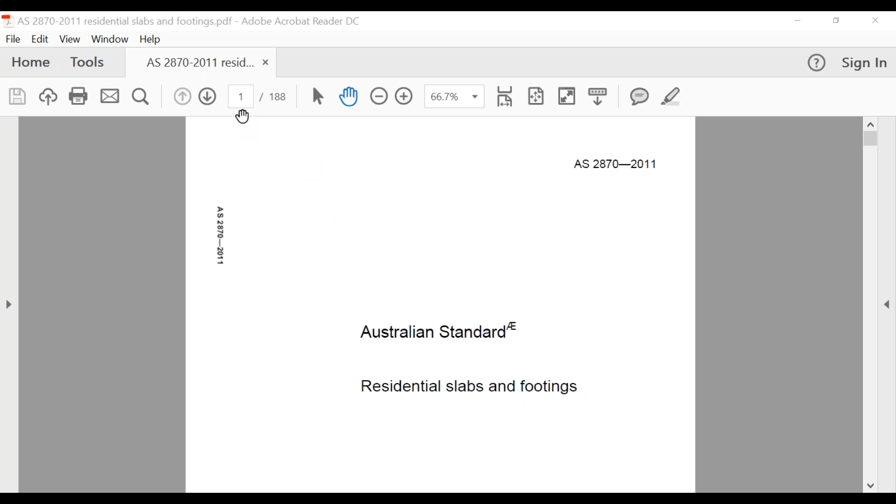But what I want to show you is, and some of you guys might have covered this in your face-to-face classes, maybe you've been given this feedback from your trainers, but I haven't received this until recently from one of my students. So what I want to cover is on page 147 of our Slabs and Footings, and it's got to do with basically doing our raft slab. I'm just going to put this in here and show you.

I've got a couple more pages. Now, as I said, I haven't had enough time to go through this and say this is exactly what's on the assessment, this is what you've got to do, but it'll give you a bit of an understanding. If you read through this tonight on your own, and in the next week or so this comes up in your interview for a DBU, DBM, or maybe DBL, then you'll be able to basically nut it out.

As you can see here, normally the plans we draw with a raft slab are pretty basic, and this one here has got a few indentations in it. So what this actually talks about, there's a few other things I want to cover. I just want to show you the picture there, and then I'll roll back a page and we'll read through what it tells us in our Australian Standards.

So if I scroll back a little bit up here, it just says beam continuity in rafts. We've got this highlighted in a different section of our Australian Standard, but this is in the Appendix C section, whereas the other part we're doing is just in the more general part.

So some of this is going to be the same, but what I want to talk about here, it says - should beams be continuous in a straight line from edge to edge of the slab? This is more important than putting beams under walls when beams cannot be placed in a straight line. So it basically tells us we want to have them in a straight line from edge to edge, and that's more important than putting beams under walls.

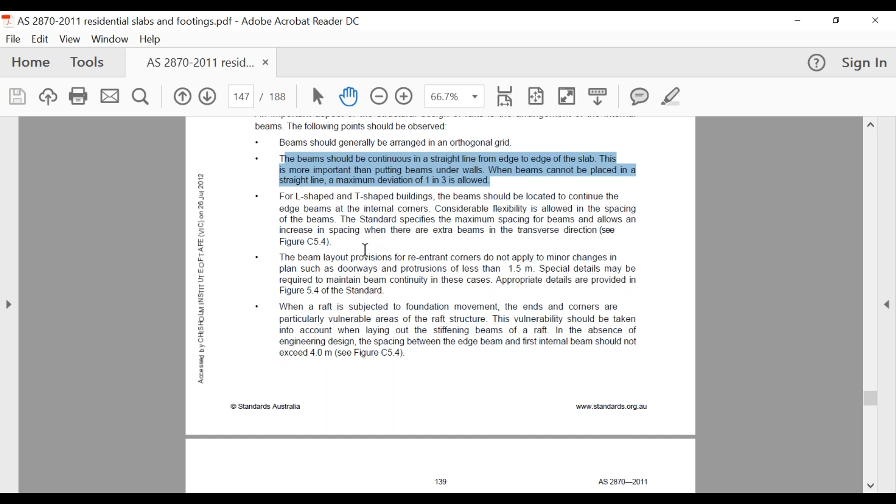And that's when it tells us to see Figure C.5.4. Because I'm struggling tonight - we're only 10 minutes in and I'm talking like Kenny Calendar. So this is, I presume, our Figure C.5.4.

If you were to basically - we're not going to do any activities on this tonight, I just want you guys to be aware of it, have a read over it, and I'm sure you'll understand it. And that way, if you get a bit of testing on it, you'll be able to reference this and do it. So read these parts down here - it talks about reentrant corners on both sides greater than 1.5 meters long, and the internal beams are arranged to provide full continuity at the intersection.

So that's going to refer back to - I'll just grab the page, which we would already have this marked in our Australian Standard. Just bear with me, I'm just flicking through my hard copy here to find the page, the part where it talks about continuity in beams. So just got to find the page that that's on.

You can tell because I actually train all the time, my tabs are starting to fall off. So that's on page - basically 152. I did cover this a little bit last week as well. So not 152, on page 52.

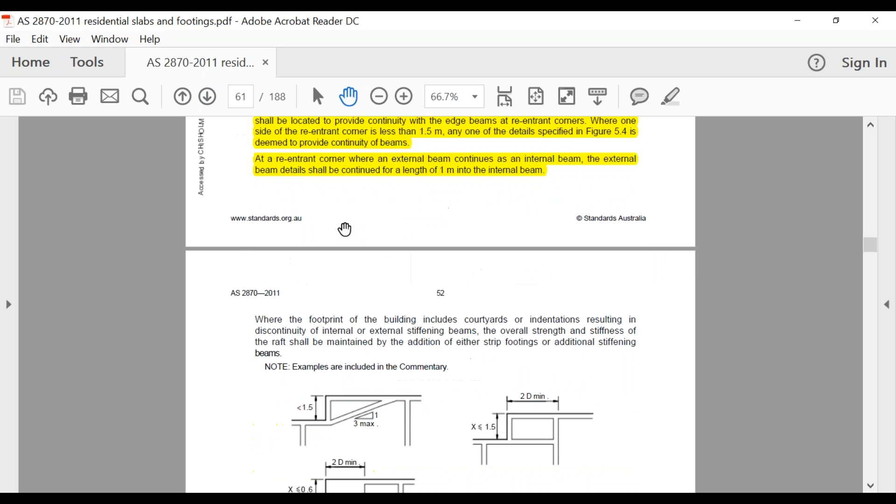So we talked about this, gone the wrong way, a little bit last week. Just read it on your own - this is talking about these step-outs for reentrant corners, and some of that does refer back to here. So if you can be across basically this part here, beam continuity in rafts, and then that part that I showed you on page 151 - it is, I find, probably the most challenging part of the course.

Just for me being a carpenter and doing a lot of subfloor, a lot of form work, but not being an expert in our raft slabs, because not many of us are concreters. Even I used to do a lot of my own waffle pods, where we do all the form work, put the pods in, put the steel in, and then basically just be on the vibrator or the shovel when the concreters came out to actually pour it. I presume that's probably what most of us are like here, and probably wouldn't be that involved in setting out a raft slab, like a stiffened raft. So it's probably a bit beyond our comfort level with our knowledge.

So if you read through that part I just showed you on page 151, I'm sure you'll be able to make enough sense of it so that if you are given some sort of testing to do with that, you'll be able to reference it. I pulled it down the page wrong again - I thought it was 151, must be 157.

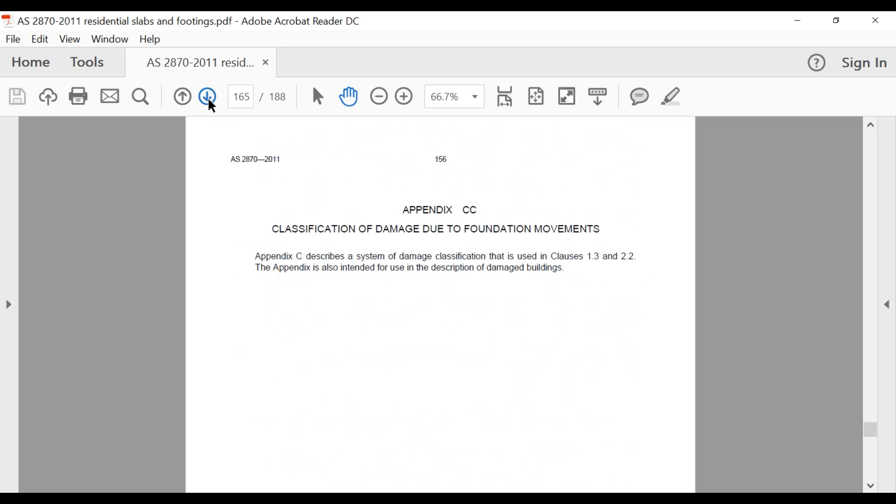Whatever page I was on before, where it showed that step in basically that 1 in 3 step - if you can be across that and those reentrant corners, have a read of it. If you've got any questions, ask me next week, but you should be able to answer any questions the VBA are going to ask you on that. So that was just a bit of an update from the guys who went through it last week or so. All right, I'll get on to tonight's session.

I do this a little bit differently to how you might have done it in class before, probably because we've got the use of the computer as well. I can send you over some extra curriculum, so just bear with me a second and I will bring this up - I would have emailed this over to you guys.

All right, bear with me a sec. This is great viewing on your end, no doubt.

So this here I just emailed over, and this isn't going to be a make or break part of your license, but because this builder registration course is designed for pretty much any license class - the guys doing your DBU, DBM, or DBL in carpentry are pretty much going to do this whole course. But if you've got guys doing a class 10 license, you're probably not going to be asked too much on waterproofing, I would presume.

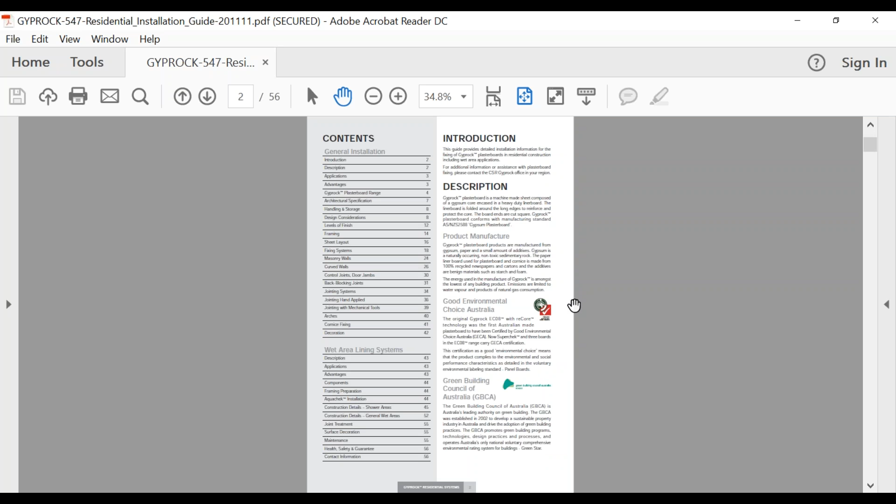But this is just from Gyprock, and this is their installation guide, including wet area systems. It's going to talk about - actually I'll bring up the page, make this a little bit bigger. It talks about their plasterboard range, how we should handle and store their materials, and the different levels of finish.

So if you're not sure about plaster, guys, there's actually different levels of finish. Going off the top of my head, I know you get different grades - I think level 5 might be pretty much where they've got to basically top coat the whole wall, things like that. So this will talk about the levels of finish that you get.

And then you as a chippy, if you know you've got a level 5 finish, it would talk about - I don't know if it'll be in this guide or in the Australian standards - the amount of deviation you can have across your studs. If there's a plasterer there, you'll tell me the figures, but it's something like, if you're using an 1800 millimeter straight edge, then your studs can't deviate more than 2 millimeters over 1800.

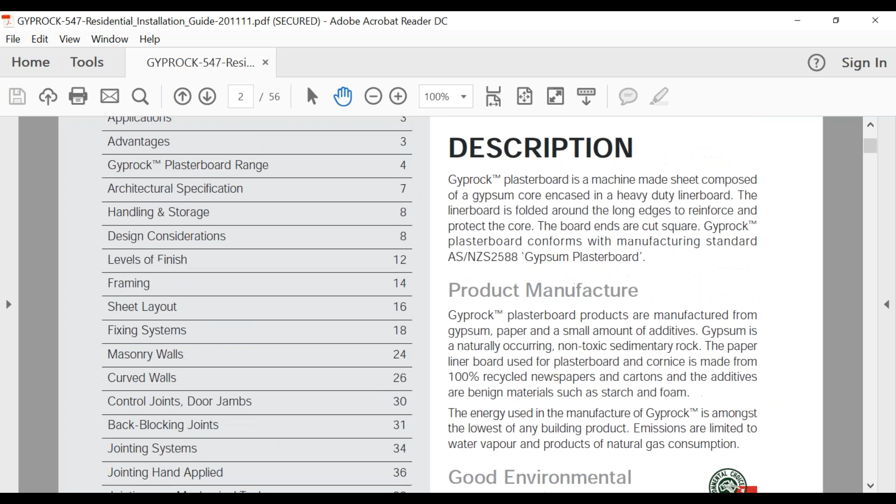So obviously if our studs have got too much of a bow in them, then we can't achieve this level 5 that has to be achieved through our specifications. Then it talks about the different framings that we use, how we've got to lay out our sheets, how we do masonry walls, then our control joints around our door jambs, back blocking, and things like that - cornice fixing.

So what I want to make you guys aware of is that when you become registered and start doing work for clients, we've got to guarantee that house. It's hard to be there the whole time and see every little thing that every tradesperson does, but guaranteed - I had this on my house that I recently built. Mine's only about 18 months old, and I had a bit of a problem with one of my flashings. There was a little bit of water that had come through, and they had to reset one of my internal corners in the bedroom.

I also noticed that a couple of my screws on my plasterboard had actually popped. Not all the way out, but you could see the head of the screw. So I said to the builder who built it, look, this is also why you're here, you've got to fix this room, you'll notice on this side that a couple of these screws have actually popped. So under his contract, he came back and fixed the waterproofing.

I didn't want to be a pain in the bum to him, so I thought, well, if he's here, I'll get him to fix this one as well. It's part of his guarantee on the house. So he knocked them in, or whatever he did, put his plaster over and repainted the wall.

So what I'm getting at is that you want to make sure your plasterers are doing this, because depending on your relationship and who you use, if it's 18 months down the track and you start getting a few pops in your ceiling plasterboard or wherever, and you get told to come back, depending on your relationship with that plasterer, it might be hard pressed getting them to come back. Therefore you've got to foot the bill or do it yourself or pay someone else to fix it for you, because it's up to us as the builder to guarantee that work.

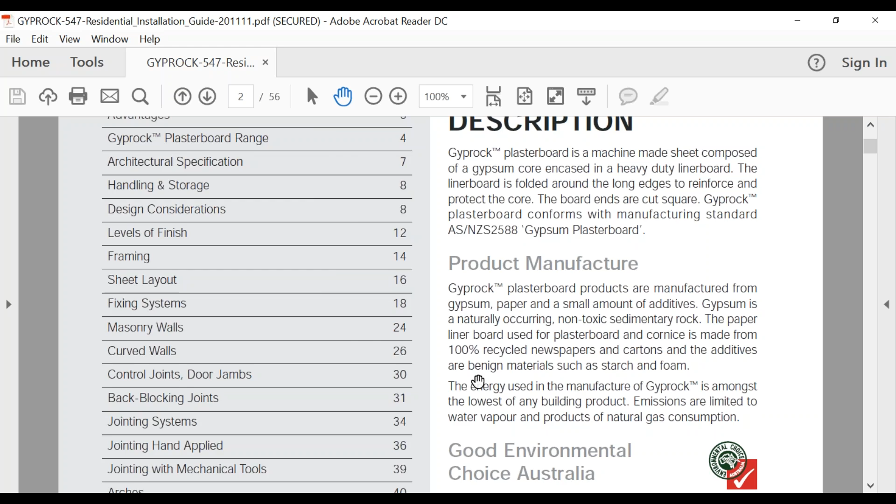I would say to the clients, look, these kids are only 16, they don't have the skill set yet to be setting the plasterboard, so I recommend you engage a plasterer yourself, and normally the charity would pay for that. So what happened was, when I had these 16-year-old kids, let's say it was CSR, I actually went and downloaded the actual installation guide for their ceilings and walls, ran the kids through it, printed off a couple of copies, put them in the house and said, okay, this is how this has to be fixed. And we fixed this plasterboard to the specification.

I'll see if I can show you. It would have been something very similar to this booklet I've got here. So let me see if I can scroll down and find what I'm after.

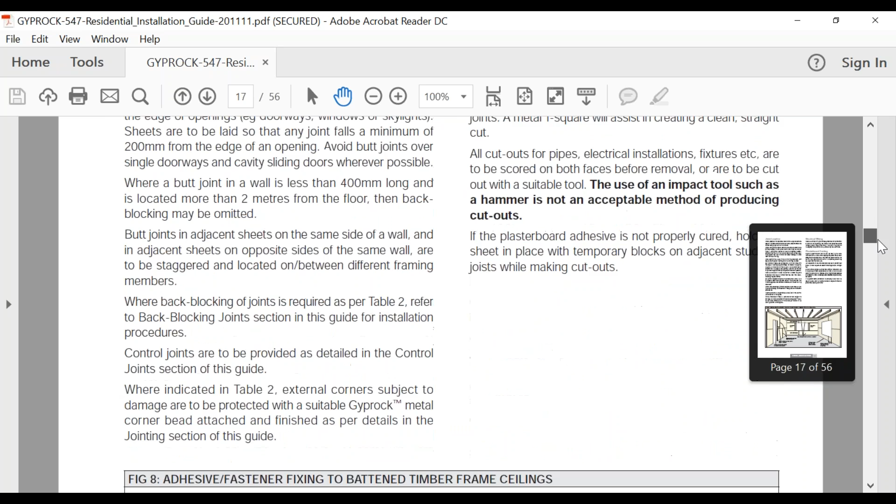Yeah, that was something like that. And it showed basically when we did sheets. Anyway, so while I'm looking, I'll keep telling you.

So I've basically told the kids, this is how it needs to be fixed. Here we go, we've gone and fixed all these walls. As per this here, it talks about when you put your dobs of glue in, what the spacing between those needs to be. And when you put your screws in, 200 millimeter centers on the butt joints, and you can't have a screw within a certain distance from where your glue is going. Then it talks about having a 6 or 10 millimeter gap underneath the board, which is pretty standard - I don't know anyone who doesn't do that anymore.

But what I'm getting at was more to do with these screws and the fixings we put in, and then these parts here. As you can see, the way it was in our manual was pretty much just to screw top and bottom of the sheet, put all these dobs of glue at 300 centers, and then we'd put temporary fasteners on there, grabbing an off cut of plasterboard - we called it a tile - putting it on, screwing through the tile into that stud, which would hold it there until it sets. Then we'd pull those tiles off, and the plasterer would just have to come along and set over those holes.

Anyway, so the story I'm getting at - I'm probably going long-winded here. Basically what happened was, once we'd done the house, because we did about 4 houses, the plasterer who'd been engaged by the owner - a qualified plasterer, got the money from Rotary - came through and said, 'Mate, when are you going to be finished? I'll come and do the setting.' He came through and had a look to see how much he had to do.

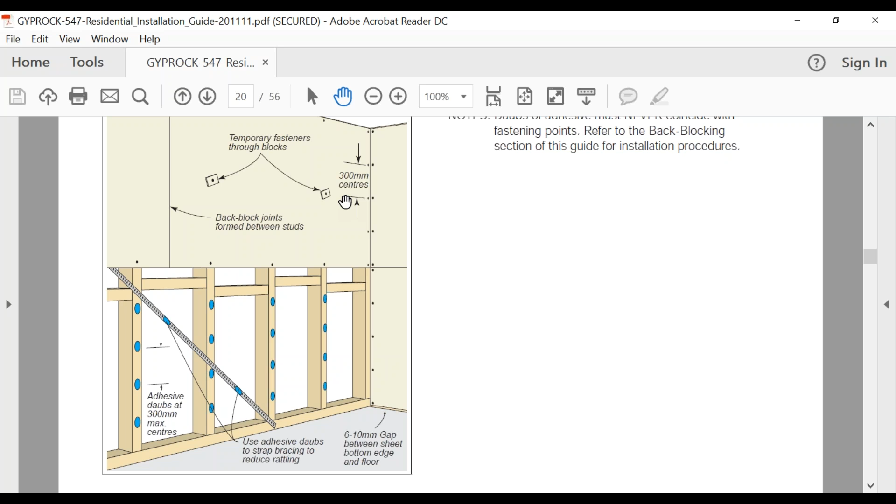Another one too, when we did the ceiling - when you back block the ceiling, it's got to do with when your ceiling joint isn't joining over one of your battens. It actually specifies the size of the offcut you need to put in there as the back block. If you don't know what back blocking is, it'll be in here. I don't want to go on too long, but basically, in our ceiling, a back block would be a bit of plaster we'd put in between there, so the joins on the sheets didn't actually flap.

And so it actually specifies basically how big that needs to be, the back block in there, and it specified that we had to do it with, I think it was, a 6mm notching trowel with corner cement.

And because these were pre-apprentice kids, we didn't have too many tools there, and I said to this plasterer when he was there, look mate, would you happen to have a notching trowel? He said, mate, what do you want a notching trowel for? And I said, well, we need to back block the ceiling, and it says it needs to be done as per this here. And he said, oh, don't worry about that.

He said, no, I just use a bit of stud adhesive and just a bit of offcut and chuck it up there. And I'm not saying that doesn't work, but what I'm trying to get at to show you guys is that you are the ones who have got to guarantee this.

These are habits that people pick up, that we're guaranteeing their work. So the last thing you want to be doing is going back because your plasterer has only put half the amount of glue on that he thinks he needs to do, and probably he looks at it and goes, yeah mate, it's not going to move anywhere, but he's not the one who's going to guarantee it.

So he probably thinks, yeah, it hasn't moved in 3 months, by the time the defect period is, we're all good. But as we know, we've got to guarantee that building for the 10 years of Building Act, or if you have a contract for some reason, whether commercial or whatever, it might even be longer.

So what I'm trying to show you here is just be aware outside your trade what your other trades are doing, because you're guaranteeing their work and you don't want to be the one getting the calls back to actually fix it.

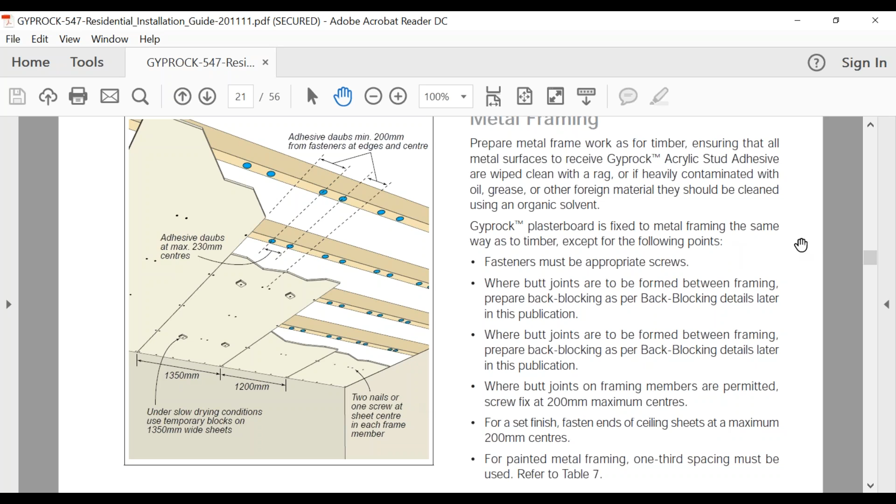So that's sort of how I introduced this unit. And I said, don't think too much about, geez, will I be quizzed on that when I go in? If you're not doing kitchen and bathroom, probably not too much. But that's why we introduce this exercise, so guys can actually find these answers. So this shouldn't take too long.

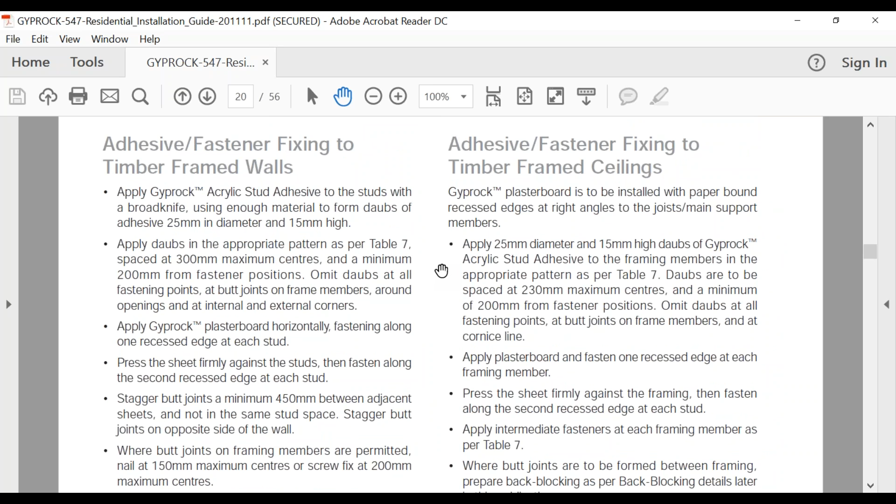Previous page of this one here. No, the other one, the start board. Oh yeah, that one, this one here. I'm not too sure whether - in that diagram there, I'm not too sure whether I understood correctly. If you look at the joint in - no, sorry, on the picture, the joint?

The previous one. Yeah, yes. If you look at the joint where your hand is. Okay, and if you look at the one, there is no, you know, like a stud at the back of the joint. Yeah, exactly.

So that's when it's just basically saying that if you don't join it over studs, then you need to back block between the studs. So normally we just join it on a stud, but if for some reason you didn't, that's when they say back blocking.

If you read about how to back block, it would basically tell you that you've got to get an off cut of plaster and stick it in behind where those two sheets join. That's what I was talking about with the ceiling, where I know it said we had to use corner cement with a notching trowel and then push that back blocking onto that. In reality, mate, I've never done it like this. I've always joined it on a stud. Yeah, it's just showing you if you're not going to join on a stud, that's how you need to do it.

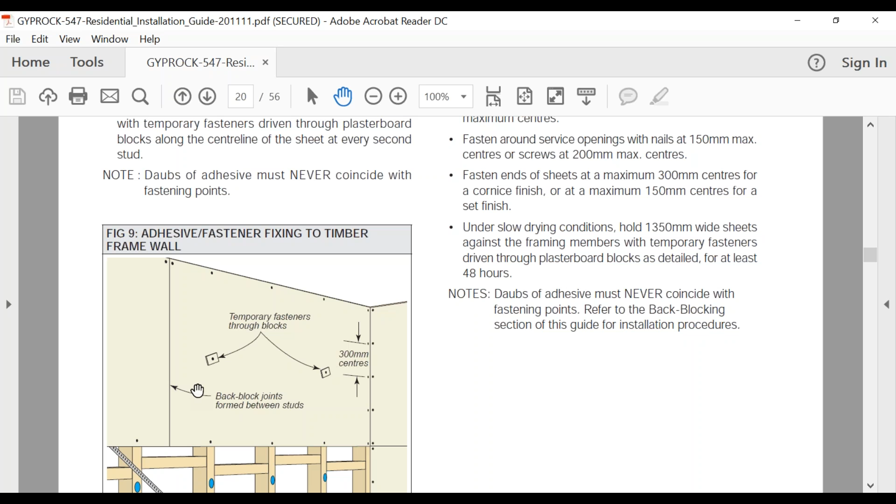Is there any minimum size for the back block, or do we need to back block it? Yeah, it would be in here somewhere. Where butt joints are formed between framing, prepare back blocking details as later in this publication. So when you guys are doing your exercise, I'll find that and bring it up. I dare say there must be a section in the booklet that talks about back blocking. So when you're doing these questions, I'll bring it up and we'll have a chat about it.

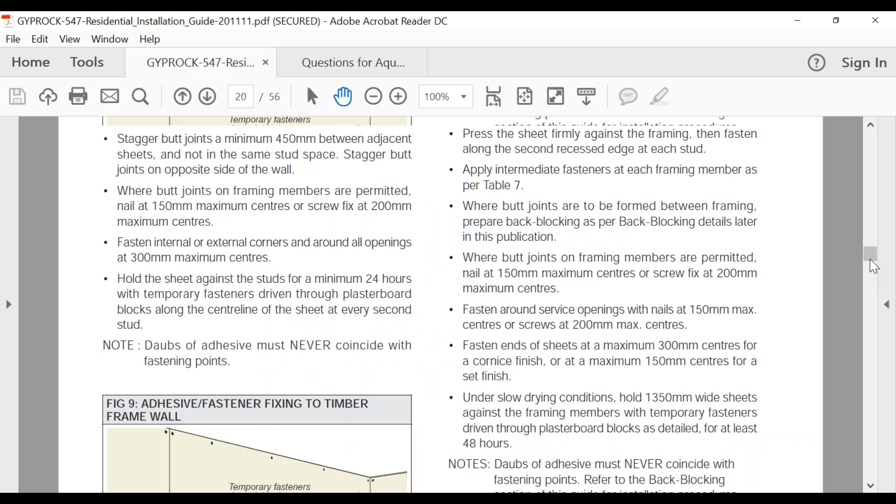So from there, guys, the exercise we'll go on with - you might have done this one before, and that's fine, so just chill out while the guys do it. It's basically this questionnaire here, and it talks about Aquachek plasterboard installation. So this is just some questions to find out of that PDF. Come to this PDF I emailed through, and if anyone hasn't got it, let me know and I'll send it over.

If we come to this PDF, you'll find when we scroll down it'll give us our different types of materials, and there'll be one that says Aquachek. I'm pretty sure it's the Aquachek installation. If we go to page 44, you should be able to answer those questions there. It's not too hard, so do that and we'll go through them. That exercise is just purely about getting you to know your products. So do that, once you're done, type in the box 'done'. We'll go through the answers and then move on to the next part.

Maybe if you have done it and you're interested, read through that document. We'll see if we can find that bit about back blocking that Valavan was talking about.

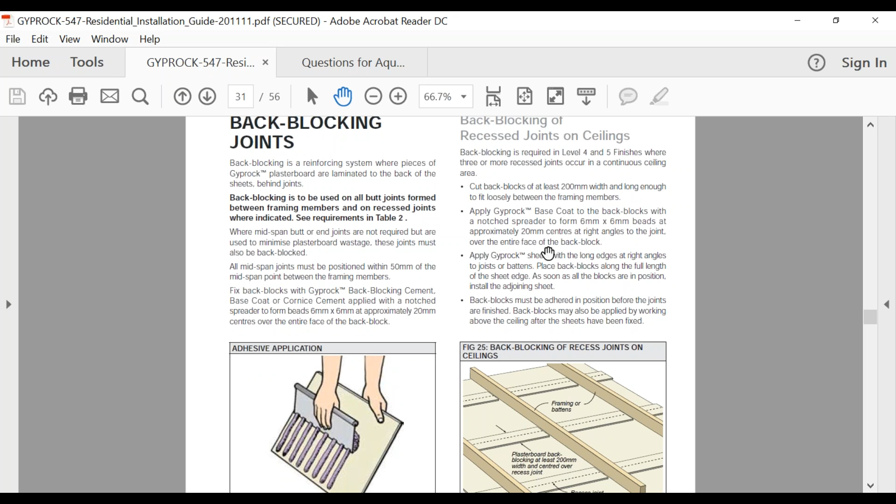So that shows him doing it here, and that's another thing too. You want to be aware, not just for waterproofing, but across the different systems you're using, whether it be different cladding. The amount of people that I speak to - obviously now because I train - we've got 12 of us on tonight. In my face-to-face class there's quite often 15 blokes there, and when I train the Cert 4 and diploma class, I've probably got 20 people each night.

So I speak to a lot of people within the industry, and it's amazing how often I hear people telling stories about how they've had to go and redo something because it wasn't installed properly. I think it's just the fact that someone gets a type of cladding, whether it be a new weatherboard or a matrix cladding, and they basically just go and fix it to how they think it should be done. Then someone in the know actually looks at the supplier's website, gets a book like this, and realizes, 'well hang on mate, you actually haven't done that how it needs to be done.' You've got to pull it off and redo it.

And at the end of the day, if you're the builder and that's the subby, I know lots of subbies who have just done it because they thought that's how it needed to be done, and the builders have said, 'well, sorry mate, it's not done right, so pull it off and do it again, or I'm not actually paying you to do it.' And then also there might be material that gets broken when you pull it off. So even if you're the builder and you've got your subbies, you want to make sure that they're aware of how it's got to be done.

And even if you're the one installing it, just take the time to go, 'okay, well actually I haven't done this before.' The night before, go onto CSR or James Hardie or whatever, just look on their websites and pull the stuff off. Once you read it, you basically can't go wrong. All right, so that's that little bit there. So keep that, and if you feel like you need to read a bit more about a few products and how they need to be installed, by all means actually go for it.

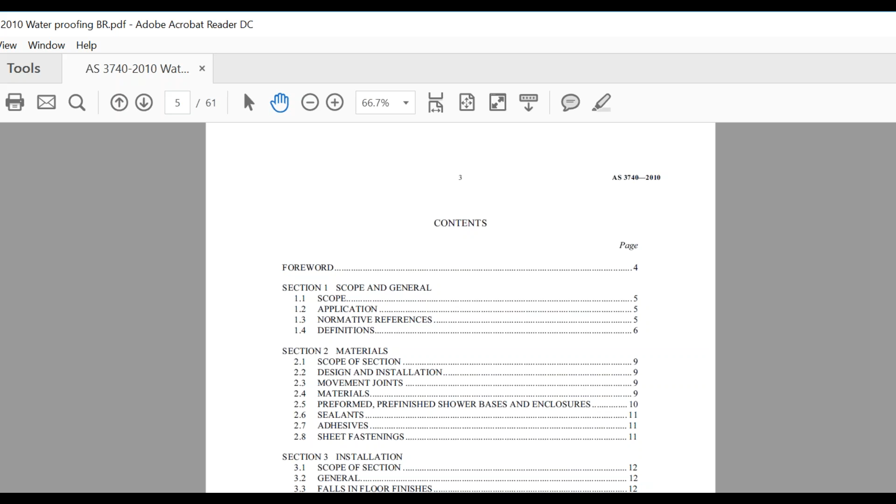On this one, if we look at it here, you don't need to highlight it, but we'll talk about this a bit later - it's about a backing rod and a bond breaker. We're going to see some pictures later on about how to do waterproofing, and we're going to see a thing that says backing rod. Most people say, what the hell is a backing rod? Because none of us really use them. So we'll read it now since it's on the page: it's a section of closed cell foam made from flexible plastics. You'll see that when we see the pictures a bit later on.

Then when they say bond breaker - Adam, what's a bond breaker? As far as the standards go, a bond breaker is a system that prevents the membrane being bonded to the substrate, bedding or lining. Put that in layman's terms, depending on how you do your waterproofing, it would be like that fiberglass tape that we use. That sits in the corner of our internal wall in a shower or whatever, and it stops the membrane bonding to the substrate, which is our wall lining. So that's your bond breaker - something in between what we roll on and what it's actually sticking to. There's a bit of an explanation that'll pop up a little bit later on.

But if you see a few things you're not sure of, another one here says basically a hob. Most of us, when we're doing these questions later - me personally, if someone said, oh Adam, can you go build that hob? What's a hob? Maybe it's me being a carpenter doing a lot of baths - I straight away think a bath hob. I'm building a hob to put the bath in so the tiler can come and put his tiles on.

But when they're talking about it here, they're talking about the upstand at the perimeter of a shower. I know that when I was in Queensland, in renovations we used to do, we used to quite often create a hob out of Hebel bricks. There would basically be Hebel bricks put around the outside of the shower base, and then they would be waterproofed over. We would basically tile it, and then get a shower screen to come and fit that tiled hob that we had made. So just don't think when you go hob, you're thinking of a bath - as per this standard, it's talking about around a shower.

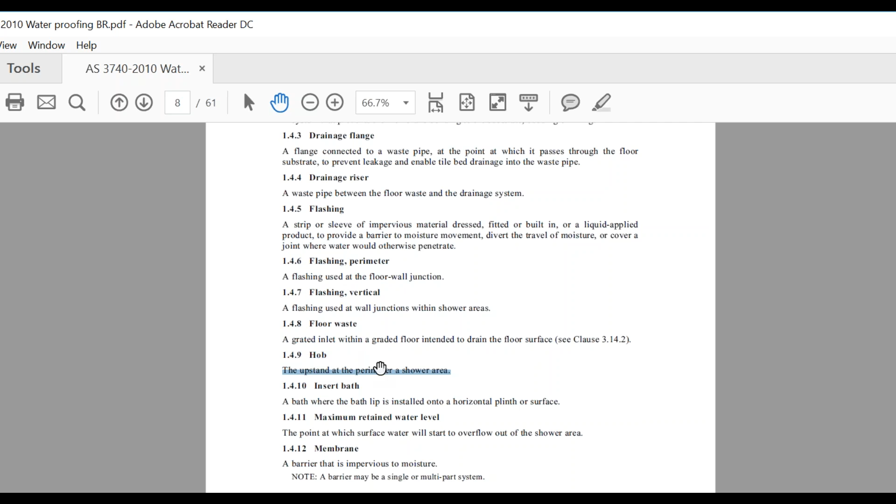And there's a few other ones in there. Don't need to go on too much more about those. I'll just scroll down to the first part that I've got highlighted.

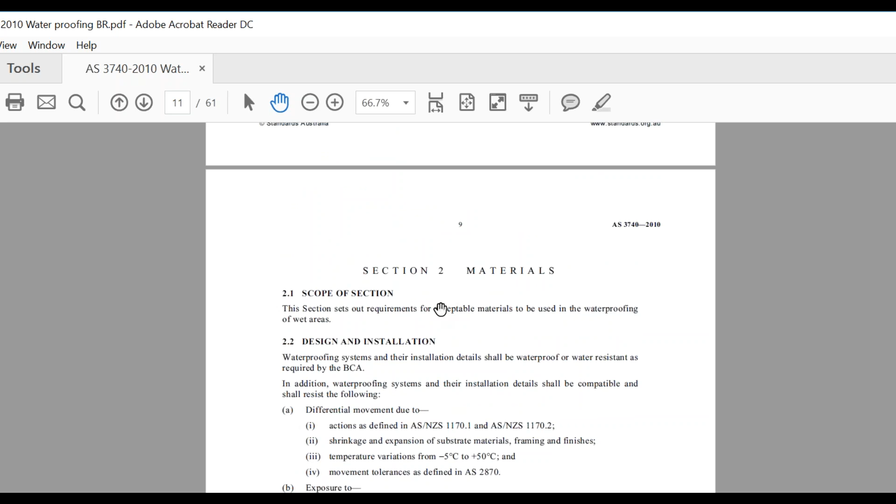So one thing you're probably going to be asked in multiple choice - you guys might be realizing this when you're doing your multiple choice and putting the answer in and getting it wrong, and you go, geez, I thought it was that. You might remember next time, geez, I got that wrong 5 times: the fall in the shower is actually 1 in 100, not 1 in 80. But we'll highlight where these are anyway. So now we want to get to section 3, which is on page 12.

It's probably the first part we need to understand when building. So here on falls in floor finishes, I've got this highlighted in my book: for general bathroom floor area, the minimum fall to the waste shall be 1 in 100. It does say to see Appendix B for information on falls in floor finishes, and we'll get onto that a little bit later.

With this book, guys, I actually don't have tabs in my waterproofing standard, purely because I don't find it nearly as complicated or as much information in it as our 2870 or 1684. So I just highlight these, and I know I can quickly flick through the pages and find it. But if you want to tab it, you could call it falls in floor finishes.

A little bit more here on shower floors, because this is to do with our showers. For areas with a vertical separation between the shower area and the wet area, such as a shower screen, a hob, a step down, or a water stop, the fall into the waste only needs to be 1 in 100. But if it doesn't have any of those, then it needs to be 1 in 80. So that's the two differentials where people might get confused. Highlight those, and we'll see some pictures later in the back of the standard that show us this.

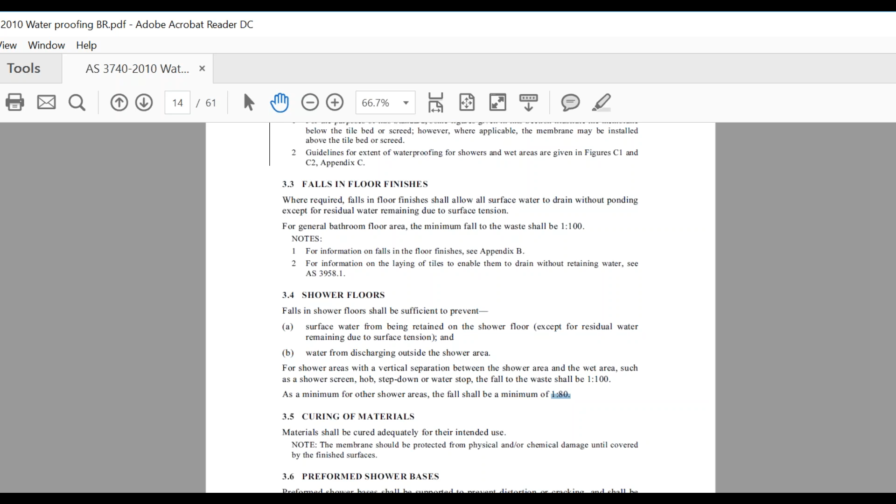This part is more targeting the guys doing their kitchen and bathroom license, but I'll train it as if we have some of those guys. I don't like to skim over things just because no one here is doing that license, so let's go through it quickly.

I'd like to show how the standard recommends we do our notching for shower trays. This is showing our studs, notched out so the shower tray can sit underneath it. The reason we do that is so when water hits the wall, it comes down and channels into the shower, and it can't get up over that lip. So what we've got down here has to go into the tray, and we always have a sealant underneath it.

We don't put that hard up against it because, as we know, timber moves and concrete moves, and we don't want it sitting hard because something's got to give if it starts to move. So we have a gap there and put silicone underneath it. Our backup is always this lip, so if something does get behind, it's going to come out and fall.

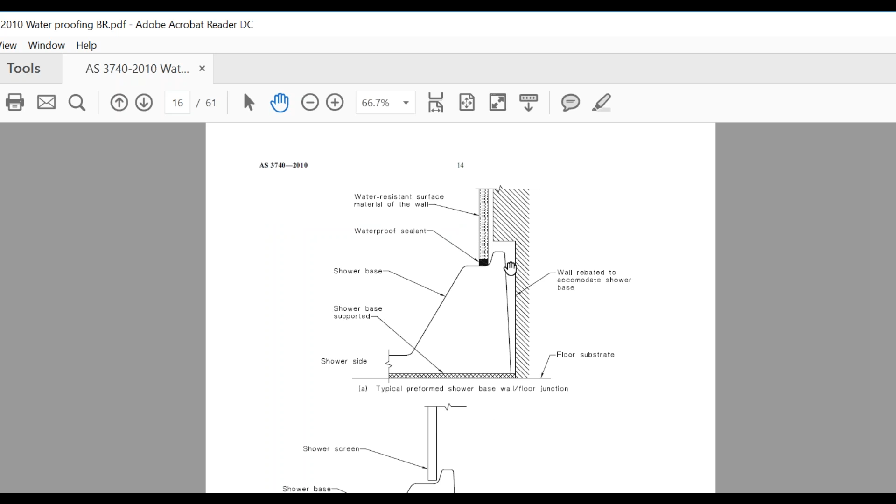And a story on that, if you're sick of hearing my story - Adam, we're sick of your story, shut up for a while. Can I make it bigger? No worries, Valavan.

But I had a house that I bought, built in the late 60s. I lived in it for a while, then moved out and rented it. The floor was terrazzo, that old polished concrete they used in the 60s, in Queensland anyway. Mine had actually cracked, and I wasn't aware of it when the renters were using it. The crack in the concrete shower, because the whole bathroom floor was terrazzo, started to leak through onto the floorboards, and then it rotted all the floorboards.

And once I realised it had happened, I went and did a bit of a patch job where I ground out the cracks and Sikaflexed it and so on. Then once the tenants moved out and I sold it, I did a bathroom renovation on it.

So I was trying to see if the insurance company would actually pay for it to be done, because I said, look, this is the issue I've got. And he came out, and the first thing he checked was the sealant underneath the wall lining. He said, mate, there's no actual sealant under there, so your water's got up over basically behind your sheet lining, gone over the back, and that's why it's basically been done. So therefore, it's not to Australian standards, so no, insurance won't cover it.

And I was like, well, mate, actually, it wouldn't have gone up over the top, because as you can see, the step out of the bath, the shower hob itself, is only about 100 mil, so it would have gone out the doorway before it went up and over the lip. It's gone through the cracks in basically my shower base - that's where it's gone through. And he kept trying to tell me, no, because this didn't meet Australian standards, they wouldn't cover it.

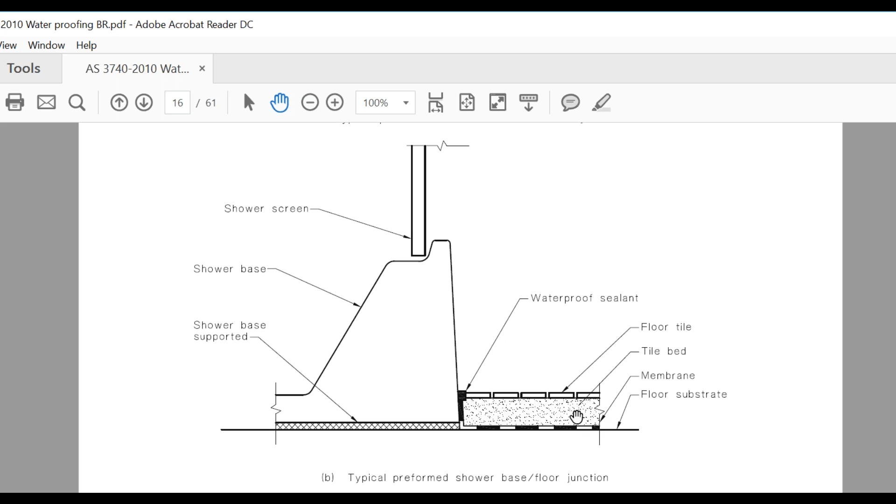And then it shows us how we basically do the outside of the bathroom area. This is going to depend obviously on what our scenario is, but this basically shows us we've got some sort of membrane tile bed, and then some silicone along here as well, so that as the water runs down, it doesn't actually run down and get through to our floor. So we need sealant around the bottom as well. That's just what I wanted to show you there.

So I'll show you some stuff on bath hobs. When we come down here, it's pretty much the same type of thing. So this is baths and spas.

Now, if someone would like to know how to install a bath, there's a book that Builder Registration sell. It's not something I use a lot when I teach out of, because the guys I normally train, other than this online class, are normally DBU or carpenters. But if you're wondering about being more hands-on and seeing how this happens, there's a great book by Alan Staines. He's a guy who writes a lot of carpentry books. He's got one there, you chippies might know it, if you're ever doing a pitched roof, and Brenko showed me this book last week, he's got it as well.

It shows you pretty much step by step, if you've got to do a pitched roof, how you build it, the span tables to work out how big the members need to be, the bevels to do, your plumb cut and your bird's mouth and things like that. But he's also got one there that pretty much is how to build a house from start to finish.

And it's great, there's big pictures in it. It shows you how to do site set out, shows you how to do a bath hob, stand frames, all this stuff. So if you're that DBM category, but you'd like to know more hands-on about how to do it, let me know. It only costs about $60, and if you don't want to get it through us, I'm sure you can get it online as well.

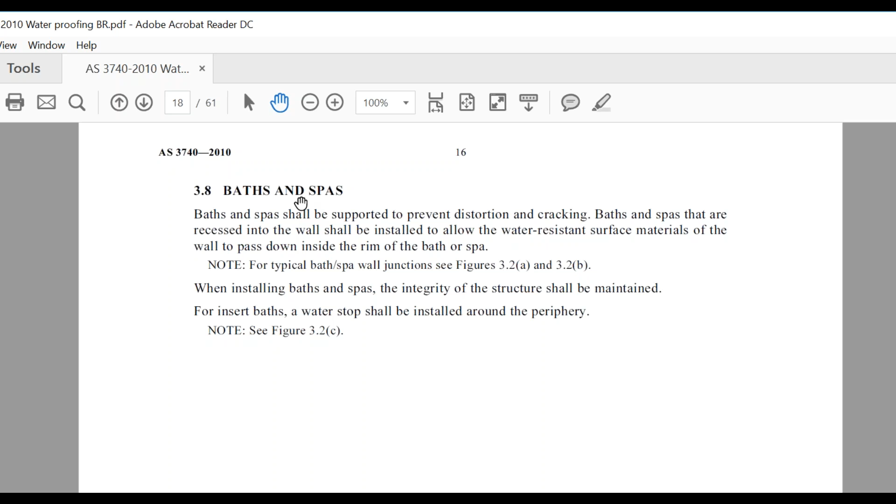I've got a copy of it. I just lent it to one of my students, but I can show you at the end of the lesson what it's called if you're interested. So yeah, that's back to this. If you wanted to actually learn how to build a bath, it would show you in there how to do it. So, but the bits I want to show you are these parts here.

So it's pretty similar to our shower. We're obviously notching out our stud so the rim of our bath can go in there, and then our wall lining, and then we have our sealant underneath it.

There are a few different basic ways we can do it, as shown here. Just be aware, guys, it doesn't show it on this picture, but between your studs you need to have noggins basically above the rim of your bath. The reason you do that is, one, it's a good way of holding your bath in place so it doesn't move too much, but also we need to be able to nail the bottom of these sheets off. So just like when we're putting plasterboard on and we screw it off at closer measurements at the bottom into our bottom plate, it's the same at the bottom of the sheet when it goes into the bath. So we put those noggins in so we can fix our sheets off.

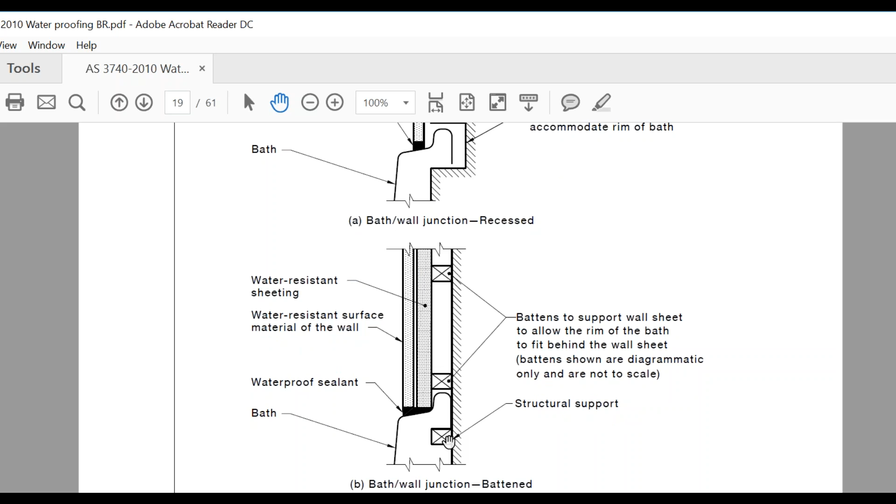Also it's not uncommon to put some form of rail or a batten underneath to support the bath. So something like this one here, where you might still do this scenario, but then have some sort of batten so the rim of your bath is supported the whole length, rather than just on each stud.

All right, so I'll just scroll through a couple more of these. Yeah, that's a bit old school, some of these ones in here, but we're talking about going around door jambs and so on. Don't need to cover too much of that.

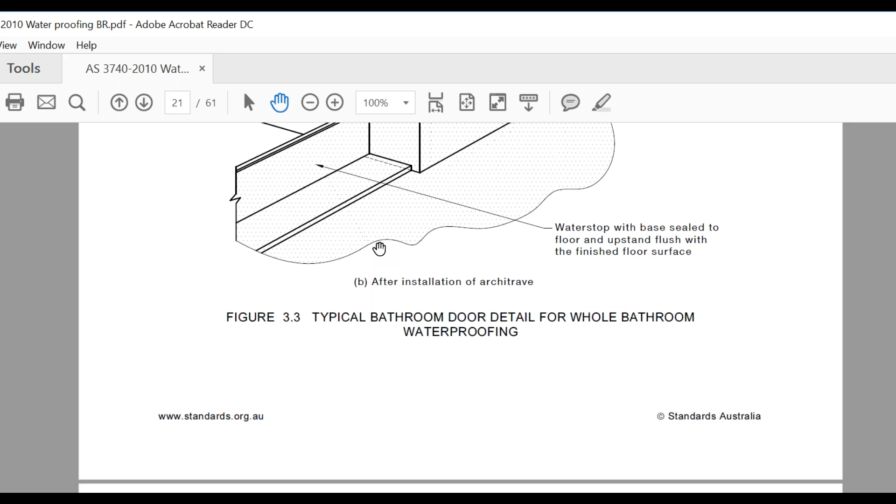So what I was talking to you guys before about the hob construction, I'll just quickly scroll down to it. I'm looking for page 25. So this is when it talks about hob construction. Just be aware we're talking about showers, and it talks about how we need to do it there.

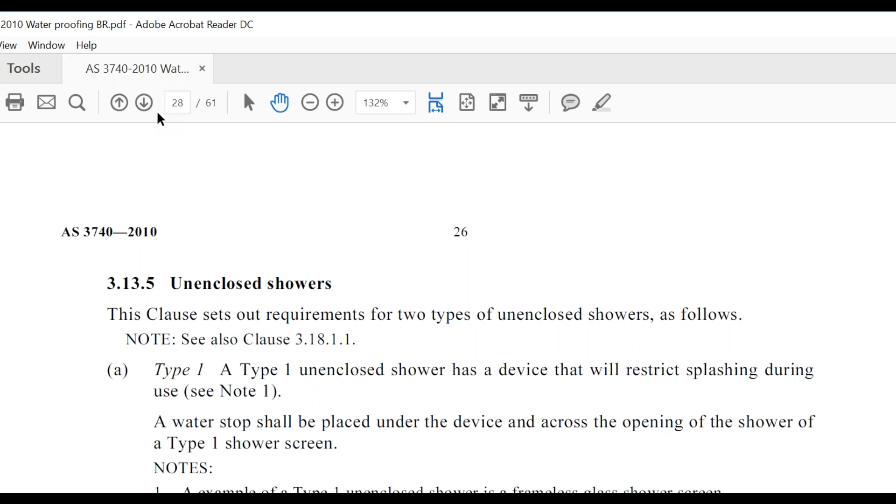And what I want to talk to you a little bit now about, so I'm trying to get to the right page, I might have gone too far. I'm going for page 27, which is basically about our different bond breakers. So I'm going to come back here.

With our bond breaker installation, remember where we said what our bond breaker was? We've got our backing rods, we've got our bond breaker, which I described as being that fiberglass sort of matting we've probably all seen, that we roll out and put on our joints. So it says here, bond breakers shall be included at wall-floor, hob-wall junctions and movement joints. And where the membrane is bonded to the substrate, bond breakers shall be of the type compatible with the flexibility class of the membrane used.

Just want you to be aware, this isn't something you'd be asked in the interview, but I find, because we do some questions on this a little bit later on, that I like to cover what these actually mean. I might have had one or two guys just recently join. If you just joined in, guys, if you don't mind just putting yourself on mute, and when you want to talk, just talk, because I can hear myself coming back through and it sounds a bit confusing for me.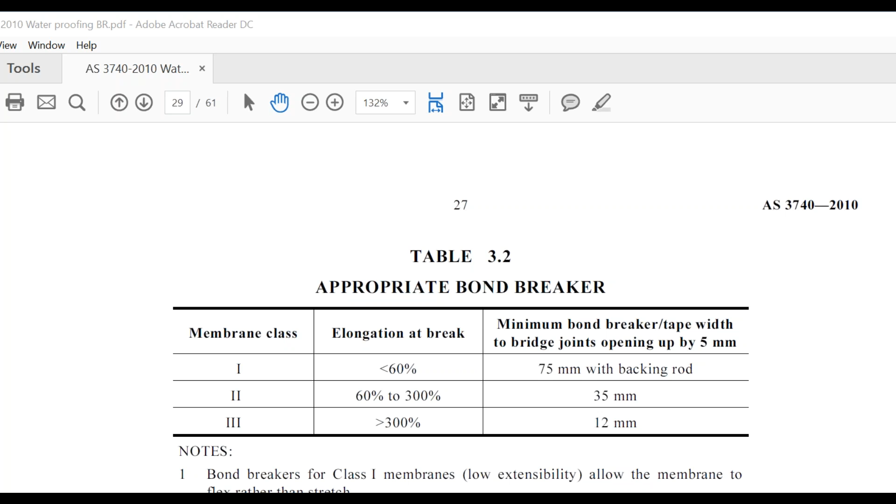So with the membrane classes, it says we need to have a bond breaker that works with our membrane. Our membranes are basically broken down into three classes, 1, 2 and 3. This is a bit beyond my knowledge, I'm not a waterproofer, but the way I understand it is that when they test these bond breakers and how much they will flex, there's a percentage there. As we read on that last page, we need to have a bond breaker that suits the membrane class. So it says that for membrane class 1, it needs to be no greater than 60%.

And so basically it's stretched until it breaks. I'm sure that if you went to Selleys or somewhere, they would have this testing lab where they have a machine that stretches it and measures how far it goes before it breaks, and that would be at 60%. So it tells us the minimum bond breaker or tape width at the bridge, to bridge joints opening up 5 millimeters, has to be at least 75 millimeters with a backing rod if we're using a class 1 membrane. Then for class 2, basically that break point is between 60 and 300%.

And if we're going to use a bond breaker or a tape, then it needs to be 35 millimeters and there's no backing rod on it. And then membrane 3 is anything that's going to go over 300%, then our tape only needs to be 12 millimeters wide. So I wouldn't be too concerned about this, because normally when you go, I would be very surprised if anyone was selling something these days that wasn't of the highest durability.

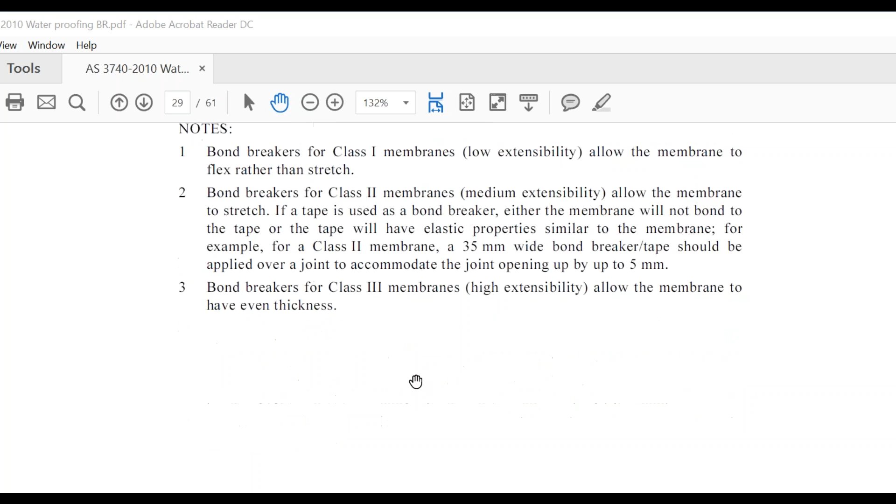So then we'll get over to this next page, and this is just really a note talking a little bit about what I spoke about up here. So if when I explained this table it didn't make much sense, have a bit of a read through that and it might make a bit more sense for you if I didn't provide enough clarity on it. This here, I'm just going to minimize this for a second, then I'll make it bigger. This is just giving us an illustration of basically those 3 different class membranes that they've actually talked about on the table before. So in the exercises we do coming up, we're actually going to draw these in.

I'll bring this up. This is actually showing, okay, this is what our wall substrate or lining is. So if you hear the word substrate, it's normally another word for basically what we're putting our paint to, what we're putting our waterproof membrane to. It's basically the part that's actually fixed on our house that we're going to be basically painting on, I suppose.

So is that a question or just someone? No, cool. So, you got a question, Valavan?

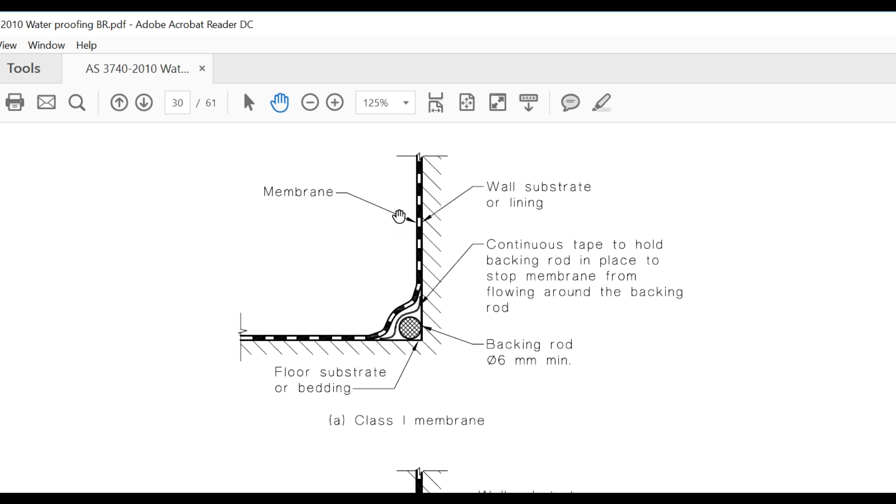Yep, yep. I was going to ask about the percentage that they mentioned just above the previous page, the 60% and 300%. I didn't really get it, that percentage. What are they talking about in that percentage? In this part here where I am?

Yeah, okay. Well, why don't I read through this and then we'll talk about it. So it says bond breakers for a class 1 membrane is basically low extensibility, which allow the membrane to flex rather than stretch. So when you look at it here, the way that I understand it, I said this is only my opinion, and so you're not going to be asked this in your interview, so I can just give my opinion rather than research it. What they're doing, they're creating basically different types of waterproofing membranes, and what a class 1 is, it's actually for something that's designed to be flexible rather than stretch.

So I understand it this way. Let's just say hypothetically you grabbed some form of, I don't know, silicone that you were going to use or some type of membrane, and say it was 100 millimeters long.

If you stretched it and it got to basically 160 and then broke, you would know that at the elongation of the break, when it failed, was 60% of what it was when you put it in place. And that's why these first membranes don't flex or stretch nearly as much as the other classifications.

So that's similar to when we talk about timber or concrete. If concrete's 25 MPa, and then another is 30 MPa, we know that 30 MPa concrete is stronger than 25. It's very similar to this here.

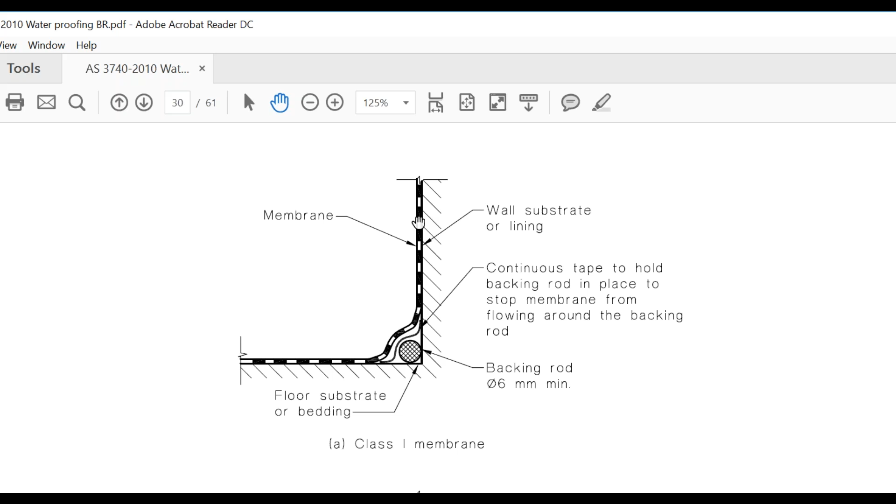So I just basically highlight those. I said you won't need to go into nearly as much depth as what we've spoken about here, but just have an understanding of it, and then maybe if you do get a question on a bond breaker, you can actually reference that and have a bit of a look at it.

So let me just scroll down. Now with this Australian standard, I will just cover this - I like to try and let the guys, I'll actually let you guys try and find it when we do something a little bit later on, so we'll come back to that one. I actually find this standard a bit dicky to use, maybe because we're so used to using the 1684 and the 2870, where we go in, we use our span tables and find stuff.

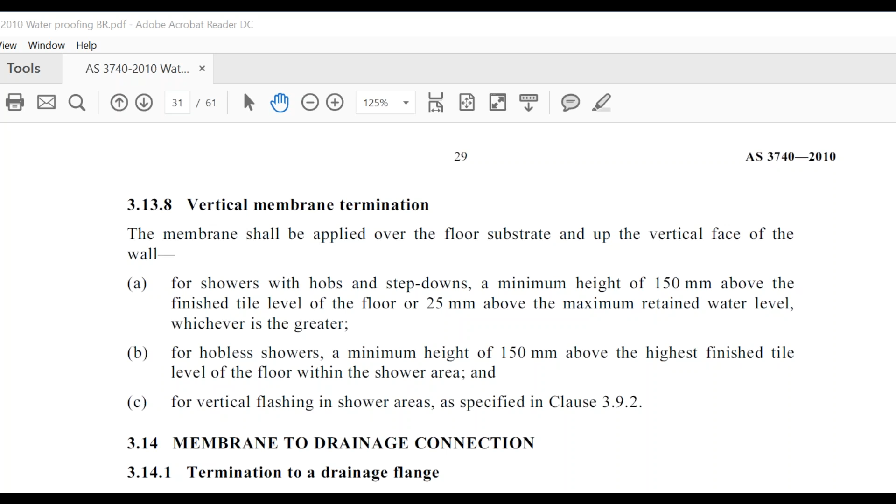So yeah, I lost my train of thought there. So I've found that sometimes it's easier to find it in the pictures. As we scroll down, we're gonna see just a heap of pictures here - I'll make this a bit smaller for a second, where it actually outlines how much we need to waterproof either side of the junction and so on that I spoke about.

There's a couple there too where one of the questions I get asked a lot has got to do with the required floor waste, and to be honest with you, I can't find anything in here where it actually specifically states when and when you don't need it. But I've just interpreted what I'm pretty sure is correct from the drawings that are on here, and we'll talk about that a little bit later on. I'll let you guys try and find those answers and come to your interpretation, and then after that we'll actually go through them.

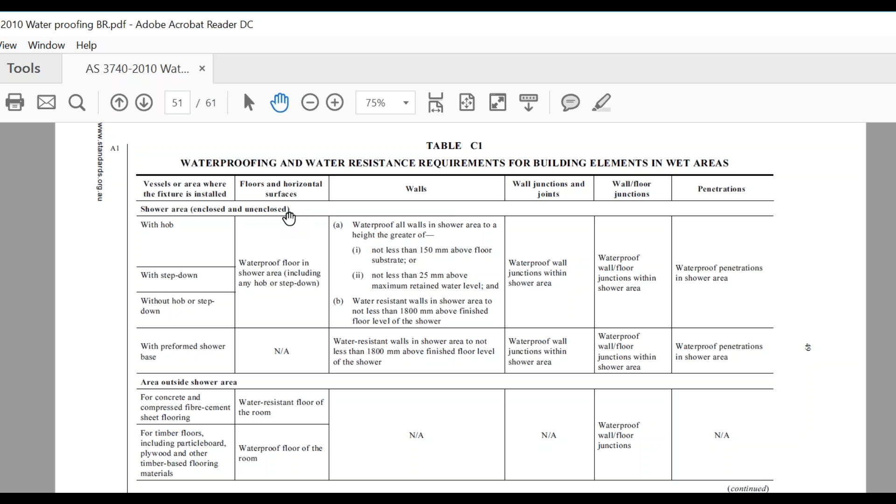This talks about our waterproofing requirements, which we've seen before when we did an exercise a few weeks ago about a subfloor. We worked out how deep the footings were, what our ventilation requirements were, and then spoke about waterproof requirements. You can find it in your Australian standard, or you can also find it in your building code, whichever you're more comfortable using to find your information.

That actually triggered something I wanted to show you. This is one thing I didn't think much of, and it might be worded wrongly in our questions tonight. I never thought much of it because some of the questions we get later talk about how far we need to waterproof above our bath and our basins.

Just be aware there is a difference between water resistant and waterproofing. So when you're doing that a bit later on, read the question, have a look at it, and you'll see the answer. We're getting close to 7:20.

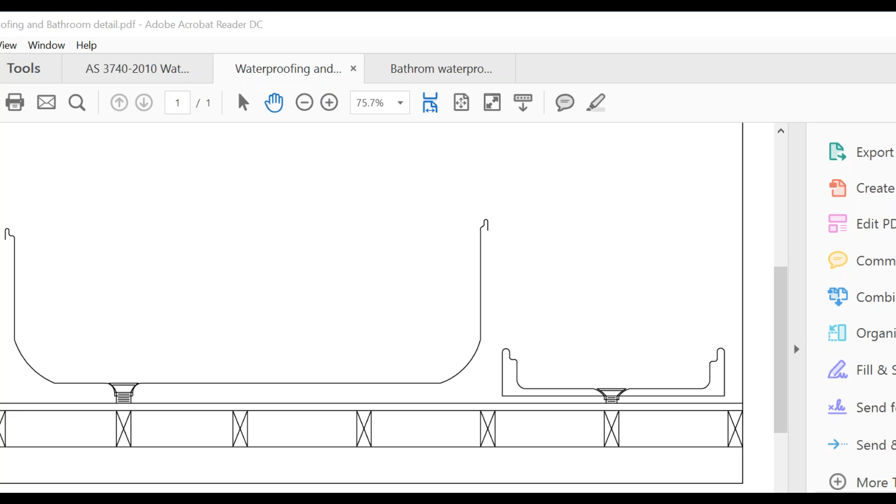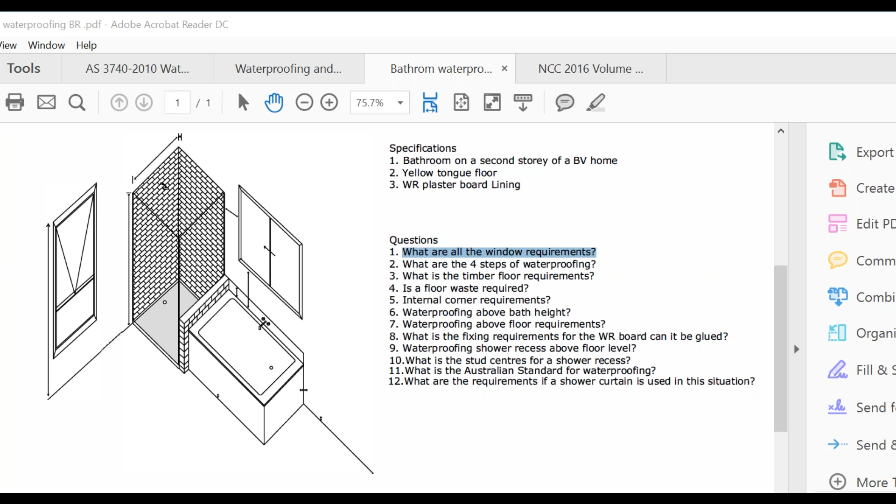I don't worry too much about that drawing and getting you guys to answer it because a lot of those are actually covered in these questions here. But I've found in the past when students have tried to tackle this, they weren't too sure exactly what it was asking them with the window requirements. And personally, I don't know exactly what they want you to say either. But what I'll do is talk about the way I've interpreted it, and I'm sure what I'm going to cover now will cover every scenario anyway, not anything you'd be asked in an interview necessarily, but just for your own knowledge as well.

I'm one of these guys now, probably because I'm a trainer. I know when I was a student, I was all about, yeah, that's great, I just want to basically pass so I can get my license or qualification, whereas now because I'm a trainer, I like to know as much as I can, so if people ask me, I don't want to say, oh, I don't know, even though there's stuff that I don't know.

So what I'm going to get is when we come to our building code over here, let me just find the section we're going to, and I'm pretty sure it should come under glazing. Let's just have a look and see how we go. And I will make this bigger when I find the page that I'm after.

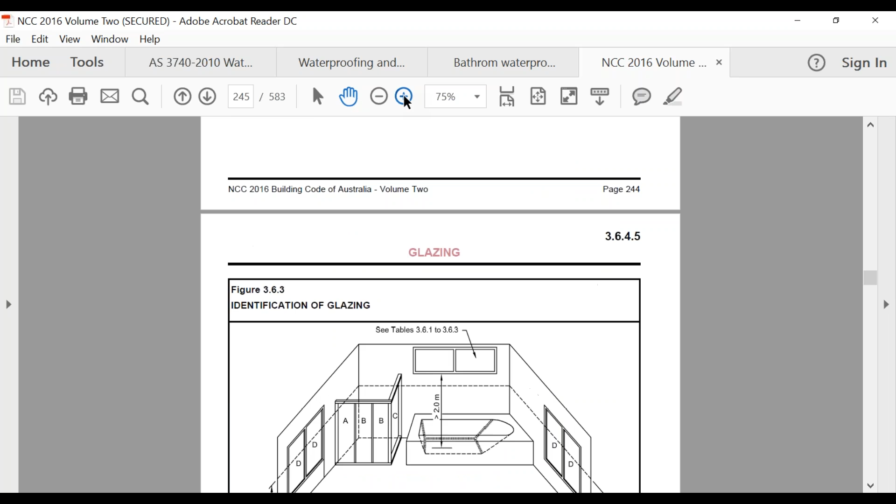All right, so the way that I've interpreted that drawing is they're trying to make us aware of this picture here. So as you can see, if you're not familiar with this, this is within our bathroom, the sort of different scenarios that we would get.

On these different types of windows or shower screens, whatever it would be, we need to have graded safety glass. This building code identifies the glazing requirements for bathrooms, en-suites and spa rooms, telling us what grade this safety glass in our rooms needs to be. So as you can see, this is what I think they're trying to get at in that picture - that if your window is basically 2 meters above the bottom of your bath, more than 2 meters from the bottom, that window doesn't need to actually be safety glass. It can just be a normal window.

So then it shows us these other types of glass, how strong they need to be. These windows here on the outside, because they're actually not more than 2 meters up, need to be type D safety glass. Then our shower screens - it's a bit hard to tell which way this opens, but I presume, just taking a guess, that A is basically the one that opens and slides back, needs to be type A. These others are type B, and then this one here that's fixed is type C safety glass.

That's why you probably see it a lot now, when I hear so many stories of people who've actually ordered windows - not for a bathroom, but windows that have been imported - and they've gone to install them and realized they haven't got the sticker on them saying these are Australian standard 1288 or whatever they have to be to actually meet the specification, whether for energy rating or whatever else. I hear that story occasionally. It's not like it happens every day, but I'm sure most of us are familiar with at least one story of knowing someone who's been on a site and the windows actually haven't been up to scratch, as far as the way they're actually made to our standards.

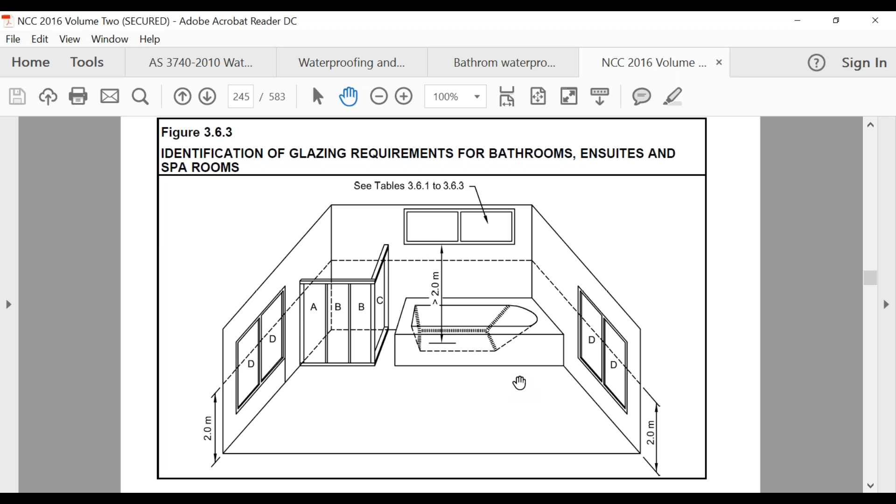So that's with this glass here. So when you go, okay, that's great Adam, what's A, B, C, and D? When you come back here, that just tells us a little bit what I sort of explained about - it needs to be safety glass and so on. But then when you come down here, this explains what our different types actually are.

So as you can see here, these are different types of glass that the building code actually recommends. We've got safety wired glass - if we're going to use safety wired glass, the nominal thickness, if it's greater or equal to 6 millimeters, then the maximum area of that pane of glass we can use is 2.5 square meters. So if we used safety wired glass and it was 6 mil or greater, 2.5 would be the maximum size of the glass, and we could then use that for our glazing as type A, B and C.

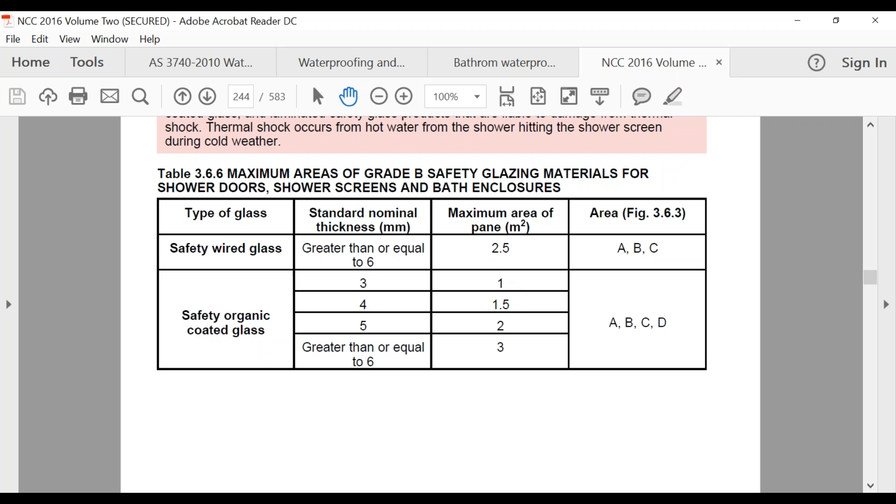So these ones here, we could use that for there. Then these other ones over here, the other type of glass they recommend is safety organic coated glass, and it comes in a few different sizes. If we're going to use safety organic coated glass and it's only 3 millimeters thick, we can't use that any bigger than a 1 square meter pane. That's obviously not going to be a huge amount of glass. If we use a 4 millimeter one, we could use a pane up to 1.5 square meters. If we use one that's 5 millimeters, it's a 2 square meter area we can use. Or if we use something that's 6 or greater, it can do 3 square meters. So that organic safety glass can be used in any scenario - A, B, C or D.

So what limits how obviously big the pane is determines how thick it is. The main part you need to take out of that is knowing this measurement here, that basically 2 meters above the bottom of the bath, and then that window doesn't need to actually have safety glass on it.

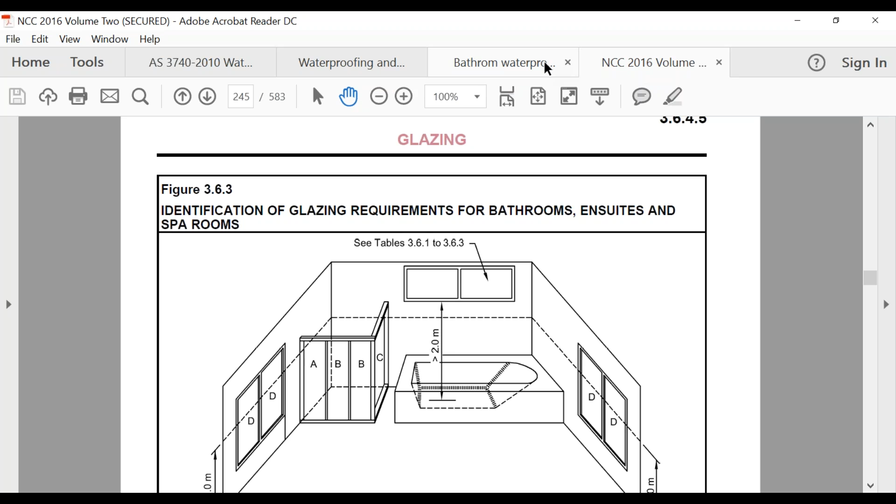I don't know if you guys have done it previously, if your trainers went into that much detail. Don't be stressed, you're not going to have to remember that for your interview. I just like to go into that bit of extra detail on these questions, because at the end of the day we're training you guys to get your license, but also trying to set you up for success afterwards. That's why I like to throw in other things that might help you out down the track.

I'm a big believer in being able to use the building code. When I did my first certificate years ago, I finished it and really didn't know much about it. Then once I understood how to use that book on site, it's basically the greatest tool we've got. You guys are probably noticing that now, checking stuff from site. So I like to throw in a few other things you might not be familiar with. From there, I'll show you this little part here as well.

It says, what are the 4 steps to waterproofing? You might have spoken about this in your class previously. It's just a little document, nothing major, I might email it over.

Let me just maximize it. This is just something that came from a supplier, and what we need to be aware of, more for your kitchen and bathroom guys, is actually the 4 steps for waterproofing.

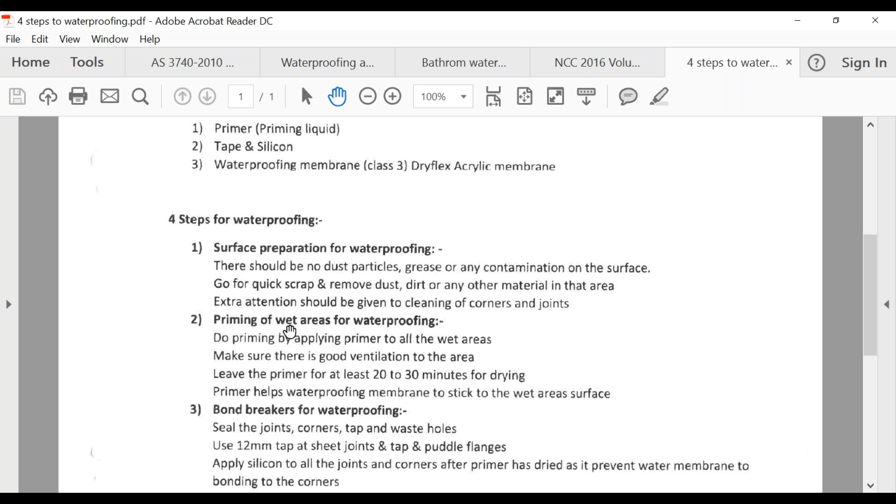So the first thing we want to do is make sure we do the surface preparation, meaning no dust, no grease or anything on the surface we're going to waterproof. Then we want to prime the area we're going to waterproof. Then we put in our bond breakers. And then we put on our membrane.

That's really designed so that when people talk about their waterproofing for their license, they actually mention all those steps. Cleaning the area, most people say oh yeah, get rid of the dust, that's understood. But the priming of the wet areas is something a lot of people don't do. And it's bloody expensive.

I know the bathroom that I did myself, the primer cost more than the membrane itself. If you're not sure what priming is, basically what the primer does is it grips onto the substrate, in this case probably our Villaboard or whatever it's going to be. The primer grips to the Villaboard, which then allows the waterproofing to grip to it.

Sure, you could look at it and think, I can paint that waterproofing straight onto the Villaboard and it looks like it sticks, but we know how long we've got to guarantee this for, and it might not last. If that waterproofing membrane has a guarantee of 25 years, that's based on that wall lining being primed with that type of primer. So if you just put your membrane straight on it, you might find it's all good, but in 6 years it starts to fail.

That's one thing a lot of guys don't do. I shouldn't say in waterproofing don't do, but I've had a lot to do with paint. I probably told you my old man owns a hardware store, and I used to work in there occasionally, selling a lot of his paint, and he sent me on some paint courses with Dulux and Wattyl and a few things like that, and I learned a lot about the different paints.

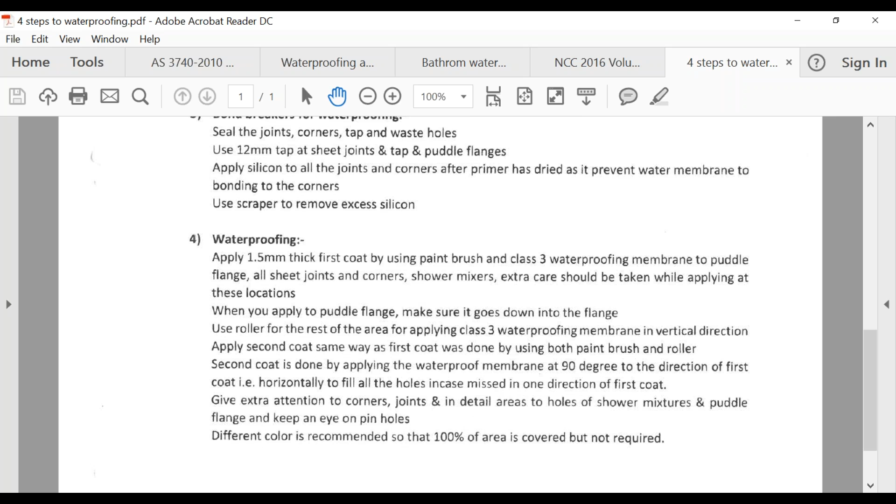But I find a lot of people, when they do this exercise, if I don't explain that to them, they start looking through their Australian standard for the 4 steps of waterproofing, and they spend 20 minutes and they can't find it. It's actually not in your Australian standard.

So from there, let's just go along and tackle this. Those guys who have done it before, you might want to redo it. If you want to log out, that's up to you. But yeah, basically, let's go through and do it.

I know Valavan's got to do it, so just start at number 3, Valavan. It gives us a scenario: there's a bathroom on the 2nd story of a brick veneer home. We've got a yellow tongue floor, so it's obviously going to be like a timber floor, and a water-resistant plasterboard lining on our walls.

So basically from there, go and answer these questions. The one you might get a little stuck on, I think, is number 12. See how you go, and if you can't get it, just leave it and we'll talk through it. Have a crack at those from number 3 to number 12, and I'll be sitting here if you've got any questions. If you guys have got any questions outside anything else, we can use this time to talk about that, and if not, I'll just sit here patiently. When you're done, just type in the box done, and we'll move on and go through those answers.

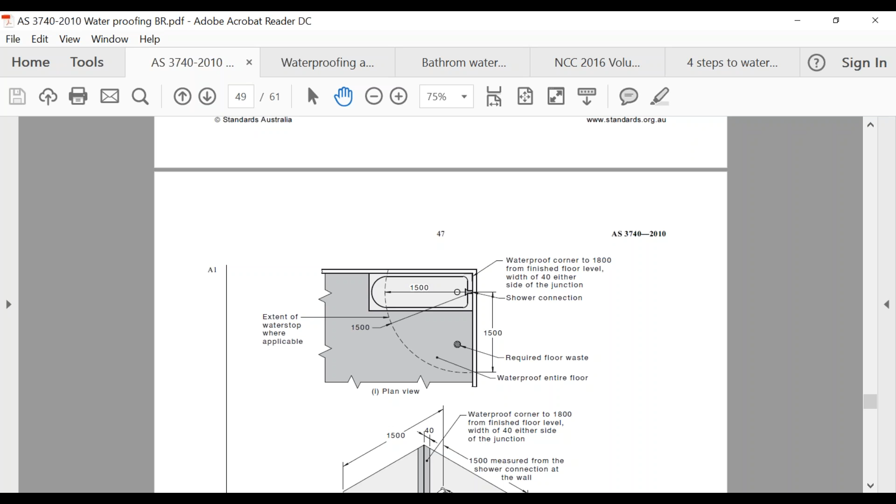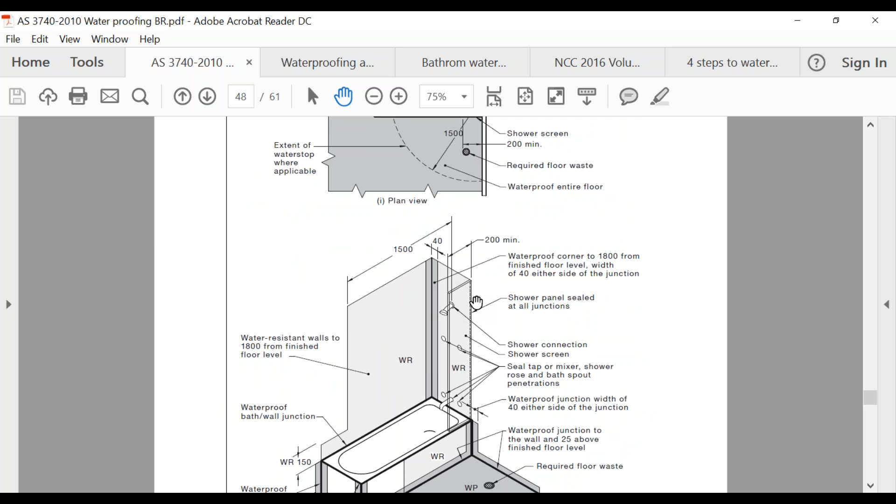The way that I determined it from here was, if we look on page 48, this one has got a shower screen, basically making that an enclosed shower, and the diagram shows us we don't actually need a floor waste in there. Then when I scroll down to this next page, this has got a much smaller shower screen, and when you start to look at these showers, whether over a bath or wherever, if the screen is that size or doesn't have one at all, you're then going to see it starts to say a floor waste is required. So that's the only way I can find it, by determining the size of that screen, whether it becomes enclosed or unenclosed, and then interpreting the diagrams.

Now to me that seems like a pretty dicky way to try and find something probably as important as a floor waste, but that's how I found it, and it's the only way myself or any other students I've trained have been able to find it either. So that's why I wrote in there that no, we don't, because out here we've got an enclosed shower on our picture, so it's enclosed. So when we come to our standard, it shows our enclosed showers actually don't have to have it. If you've got something different and want to tell me why, I'm all ears, but that's the way we've interpreted these drawings in the past.

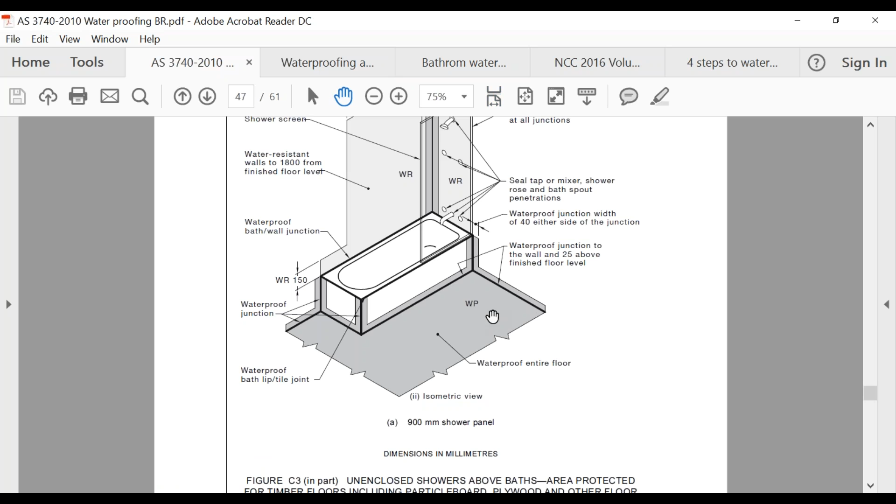Our internal corner requirements - basically it's 1800 millimeters up the corner and 40 millimeters either side of it. There's lots of drawings in there showing that, and it talks about waterproofing the corner to 1800 millimeters from the finished floor level and 40 millimeters either side of the junction.

So the waterproofing above the bath height - that's what I was talking about before. If you have a look at that, the bath, and I reckon this might be a bit of a typo in our material, it just says you've got to waterproof the bath and wall junction, but make sure that's water resistant to 150 millimeters above it. So I think what they're actually trying to get at is what is the water resistant height, but as long as you're referencing those pictures - if you've done this with a different trainer he might have told you something different, but that's how I interpret it. The water resistance is 150 mil, and that's why quite often we see things like a splashback in your laundry with just some tiles, because they're obviously a water resistant material.

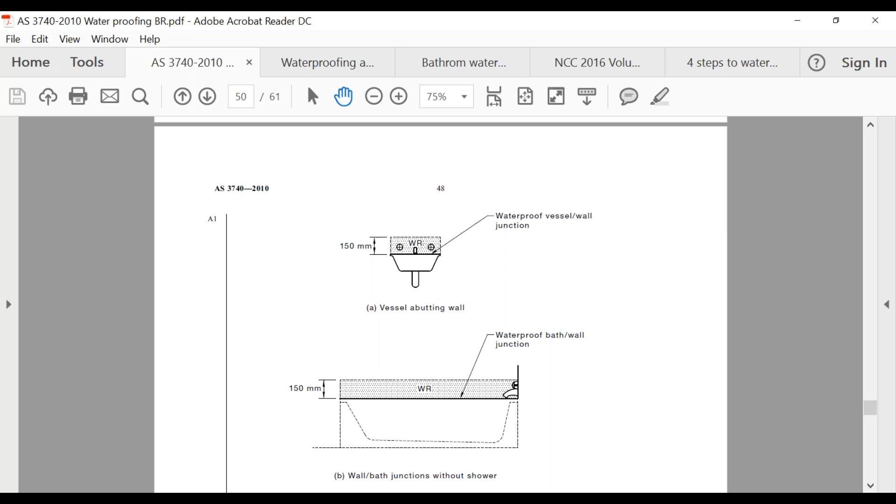Then the waterproofing above the floor requirements - same again, it depends on which scenario we're going with. Look at this one here, it's 150, but when we come back to where our enclosed showers are, it shows us we only need 25 mil. So the answer for that one would be 25. Same thing again, if you're getting one or two of these wrong, just be aware we need to know what type of shower it is. This one here is for unenclosed showers, whereas when we come back to this one, there'll be somewhere it talks about enclosed showers, and it'll basically give us that 40 mil.

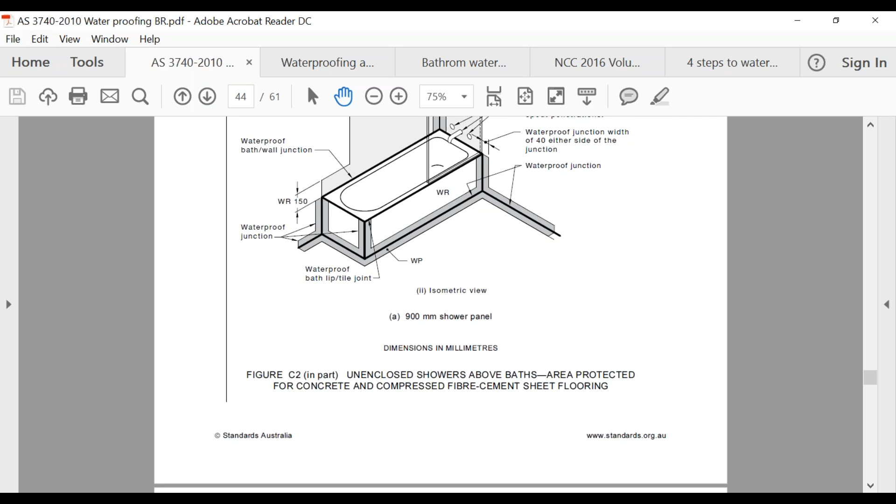Let me come back. Anyway, you guys would have found it because no one's saying, hey Adam, I didn't get that. So it is actually 40 mil. That's what that one there is.

So what is the fixing requirements for the water resistant board? Can it be glued? Well, no, we actually did that before. When it's got tiles on it, basically it's got to be screwed.

Then it says the waterproofing shower recess above the floor level, so that's basically 1800 millimeters. I sort of covered that one a little bit when I said the internal corners as well.

And here's one that I should have mentioned, sorry guys if you're looking at it for ages. What is the stud centers for a shower recess? Now that's actually not in there anywhere. To be honest with you, I don't know where I can find that in any construction manual I own, but common practice whenever I've done them is 300 millimeters.

I don't know if anybody else does it a bit differently. A lot of people say to me, hey Adam, why is it basically 300? It's just what I was taught, and it's what I've always done, and I think it's to give probably a bit more stability around that shower basin. If everyone's got a better reason for it, let me know. But it's just one of those things I've done since I was a 17-year-old apprentice, and that's what we did.

But if you ask me where that was, I honestly couldn't tell you. So it actually says 600 in the multiple choice, does it, Tom? Are you sure that's for the shower?

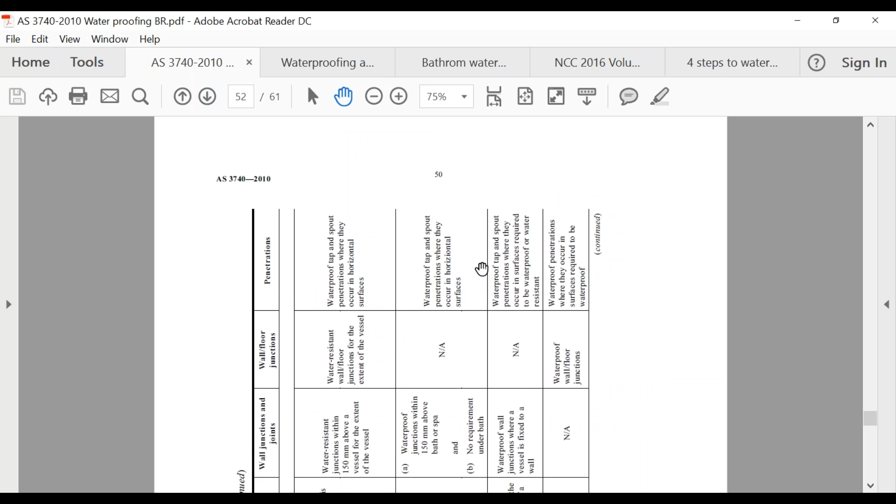Yeah, so maybe this is where it might be, if you went to the table rather than the picture. So this is where Mike's saying about it, talks about that it's got to be waterproofed. What's this for the bath? Look at page 50 and where the wall junction is. Okay, just trying to find it. Oh, so the walls, yep.

So where that one's a little bit different, that's talking about the actual - I'm just going to read this in, I'll read this properly before I spit it out. So with that, that's what I'm getting to. Look at that picture I was talking about before, above the bath. This actually tells us that the wall itself has to be basically 150 millimeters water resistant above the bath. But then if we've got a junction, like a corner basically, then it needs to - it says the wall junctions...

And joints, the same thing again there, Michael. It just says it needs to be water-resistant junctions within 150 millimeters above the vessel for the extent of the vessel. So I just can't see there where it actually says that it's got to be waterproof. Oh, here we go, it's this one here - inserted baths and spas. Yep, okay cool, so yes, just have a look at that.

It's a bit hard to tell with that picture. Yeah, no, I suppose so - that would be an inserted bath because it's checked into the wall. So you're right, I didn't look that close at that drawing. Thanks for letting me know that, Michael. So when we look, that's the bit of the difference - I got obviously tricked up by that. So you've got to actually look at these, yeah, basically it says inserted baths, and then it says walls adjoining and so on. So it actually says here that it's got to be waterproof to 150 mil above it.

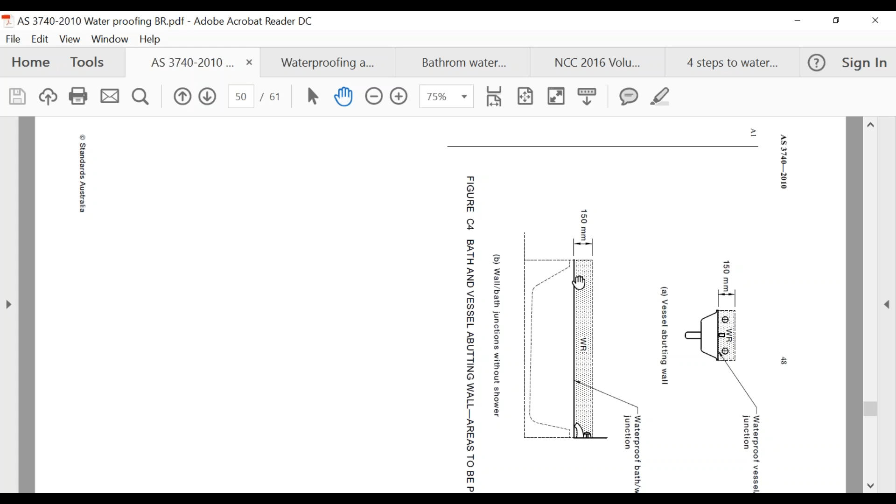But I'm presuming when we're doing something that's not going to be checked into our wall, our water resistance still has to be 150. I doubt you'll get something to trick you up like that in the exam, but if you do, just check whether it's checked in or inserted. If it's an inserted bath, if we went back to our definitions, it would give us a definition of what an inserted bath means, so we could get clarity on that question and then answer it.

Tom's saying that's talking about the spacing of the studs on the shower tray, and I'm really surprised it says that, because if you're putting in a 900 shower tray, you're only getting one on the corner and one about two-thirds of the way along, and the rest is flapping. That really surprises me. I haven't seen that checkout spacing for a shower tray written in a manual like that. I'm surprised, and I might try to track that down and make sure it's not a typo, because the last thing I'd want is for you guys to get that in your multiple choice and put down 600 when in actual fact it's 450 or something less.

Before Friday, yeah, okay, I'll do my best. I don't know if I'll get to it, but I'll check, because Steve's the guy who writes all the curriculum and he only works 2 days a week now, so I'll try to track him down.

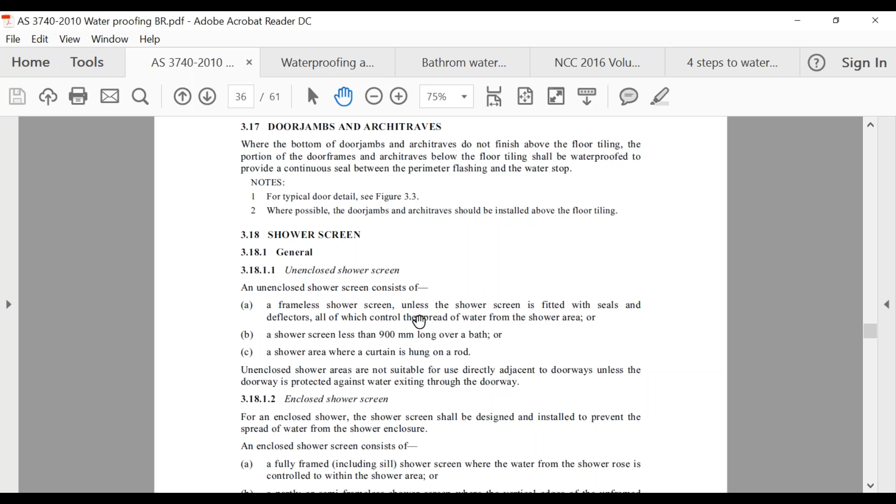Let me come back here, 3.18.1.1, where it says unenclosed shower screen. It says an unenclosed shower screen consists of a frameless shower screen, unless the shower screen is fitted with seals and deflectors, a shower screen less than 900 millimeters long over the bath - that's why we're seeing those different things about the floor base - and a shower area where a curtain is hung on a rod. Unenclosed shower areas are not suitable for use directly adjacent to doorways unless the doorway is protected against water exiting through it. So from reading that, we can determine that if we've got a shower curtain on a rod, it actually becomes an unenclosed shower screen.

If we look back at our waterproofing requirements, it probably doesn't change just because we've got a timber floor. We actually basically did the whole floor. The only thing that might change, if we look at our pictures on our standards, is basically how far up the wall we go.

So don't be too stressed about it. I'll be really surprised if they're asking you in the VBA about building a house with a shower screen and what you need to do. But that's what I'm getting at - if you find something that's a little bit hairy, go to your definitions, have a look, and from that we can determine, yes, that is now an unenclosed shower.

So when I'm actually looking at these waterproofing requirements, what are the requirements for basically a shower that's unenclosed? Hopefully that's covered that. I didn't want to spend heaps of time on it because I tied up telling my war stories at the beginning. So other than that one about waterproofing above the bath, I think we were all pretty good with those.

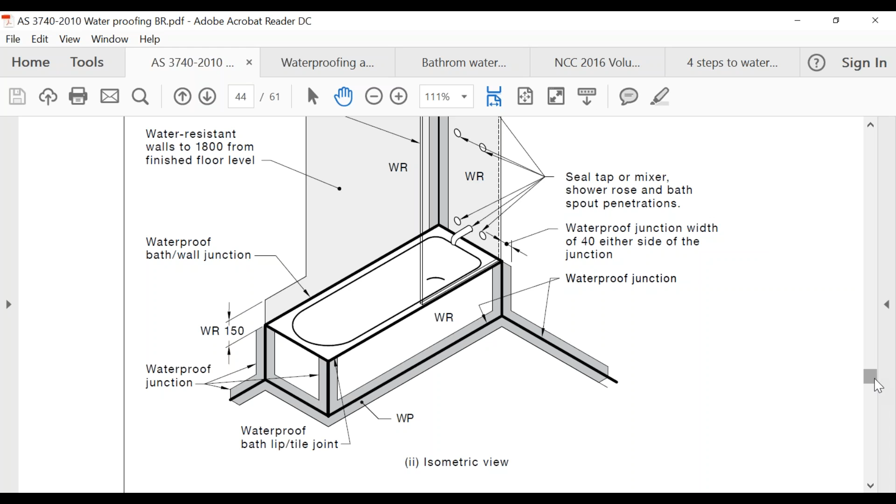From there, there's really only two other things to do tonight. This one will only take a second or two, so maybe we'll do this one first, and then you guys can quickly find those, and we can move on to the last part of the presentation. Just let me bring it up.

This is just purely copying some measurements out of your Australian standard. Some of them you've probably already know the answer for or done already. Just give me a second and I'll bring it up.

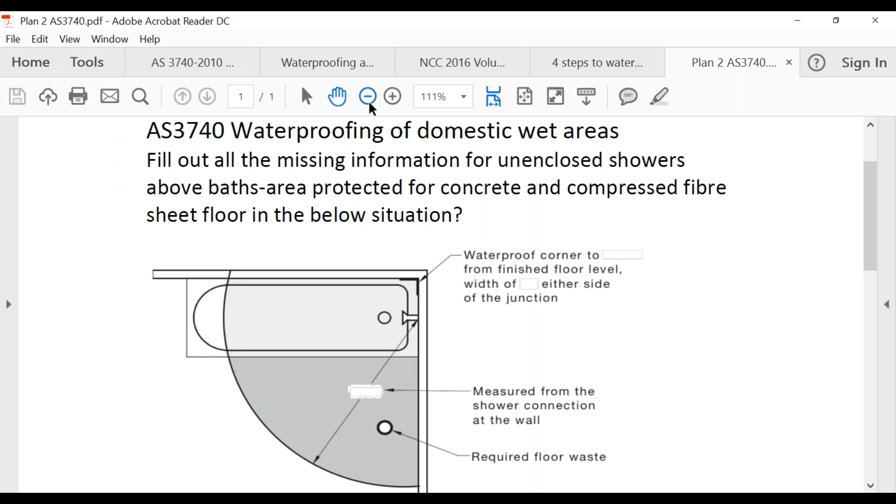So this one here - you probably should have a couple of these in there, so let's quickly go through those. All you've got to do is find the relevant picture basically in your Australian standard, and it's just missing the number - talking about how far the waterproofing goes to the corner, either side, and how high up, and so on. Same thing again, you just want to look at the pictures, make sure you're not going to an enclosed shower when it should be unenclosed, and so on.

So I think we've got - let me just see how many of those we've got. I think we might have two, possibly three. Let me just bring my hard copy out. So yeah, I think we've only got two in there.

So why don't you basically go through and do those. There's that one there that's up on the screen, and then there's another one which has got an elevation basically of a bath, and there's no actual waste out the side. So go through and do those two, and we'll quickly tell you what the answers are, and then we'll go on to this next part about our hob construction.

So Tom, if you're not actually typing at the moment, mate, tell me a little bit about your interview. You probably did tell me this, but I've forgotten - it's not that my memory's bad, mate, I just struggle when I don't see someone's face to know what we've spoken about. Are you going in for your multiple choice or straight in for your interview?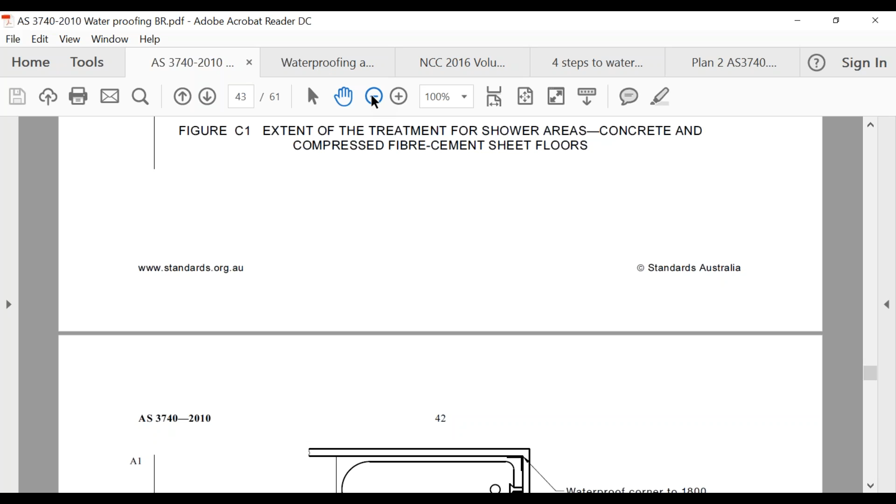Let me try and find this one here in your Australian standard. No, that's not one of them. I'm just going to shrink it so I don't have to scroll so much, and then I'll make it bigger when we see it. Yep, I'm pretty sure that's one of them. So let's make that rather large.

That would have been one of them saying 1800 basically from the corner, 40 millimeters either side. And then that measurement from our shower connection at the wall to where our waterproofing is, 1500. I'm pretty sure those are the measurements that were missing off there.

And then when we came down to here, yeah, the measurements missing were 1800 again, basically the height, 40 millimeters either side. And we've got down here, basically 40 millimeter either side of these junctions around the bath. And then the waterproofing, 1500 millimeters from the shower connection again down there. I'm pretty sure that's all the measurements they wanted on that one.

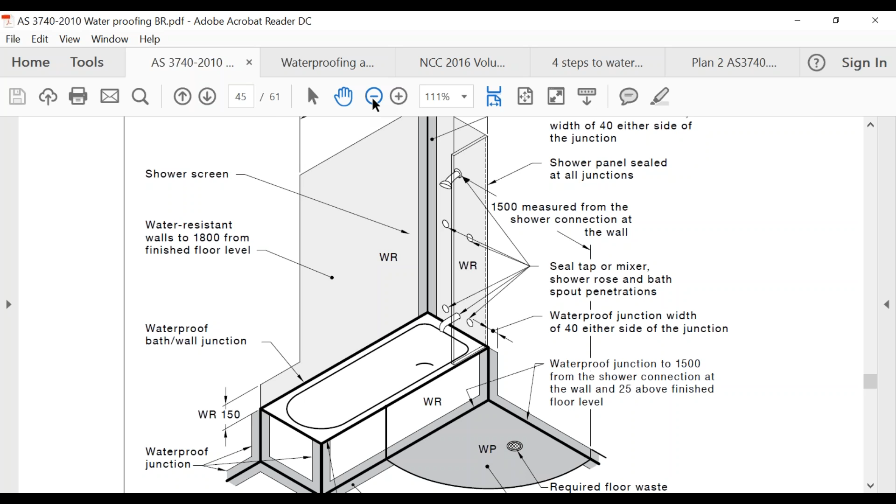And then the other one, which you would have had in your book - I'll shrink it and find it - was this one here. So let's make it a bit bigger again. Pretty much the same measurements, 1800 high, 40 mil either side. And then when we come down here, 1800 high again, 40 millimeters either side.

And the difference being on here, it says water resistant to basically 150 millimeters. And what's the other measurement I've got there? Say 40 millimeters either side of the bath. And then I'm only 25 millimeters basically at the wall and the finished floor level. So they're the two there that would have been in your study buddy, as we call it, your folder.

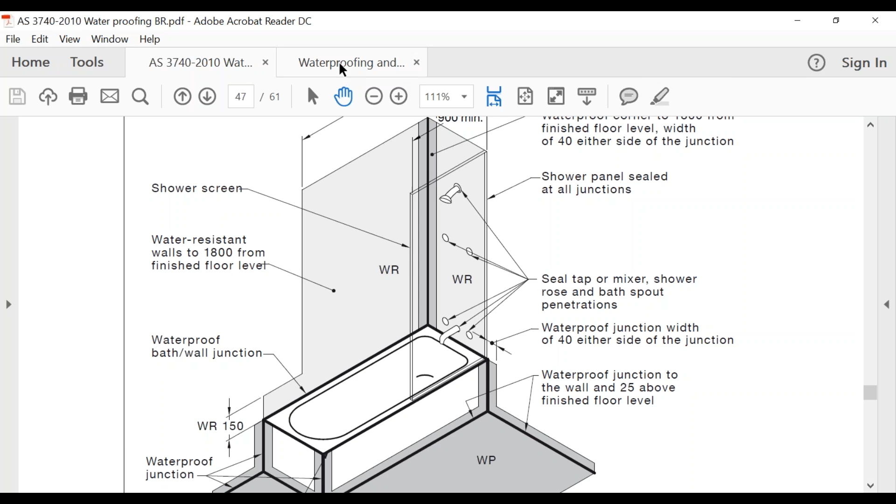So then the last thing I want to go into, guys, depending on your knowledge of doing baths and so on, let me just bring this up. I'm going to close some of these that I've got open to make it a bit easier for me. Is this one here? So I'm just going to shrink this a little bit to talk about it. So we're just going to draw this in.

So it says we're going to use studs that are 90 by 35 and floor joists that are 90 by 45, acrylic bath. So we're going to fill in the missing details.

So basically what we're doing, guys, if you look in your Australian standards, and actually if you look back to the very beginning when I showed you how we do these parts here, we check in our baths and so on, and we do our showers. If I come back up to here, we'll find a shower shortly. Basically this stuff here, this is basically what we're trying to draw in.

So we need to obviously show that stud is checked in and for that to sit on. Now it depends on how much you want to go to town on this, because I will just cover with you in your Australian Standard 1684, it talks about how much we can notch out of studs.

And going from memory, these guys doing their multiple choice will be all over this because they'll be doing it four times a week and I haven't done it for about six. I'm pretty sure the maximum notch is 20 mil, but it states for a bath it can actually be 25. Yep, there you go, Tom's over it. I knew he'd be onto it. So it's 25 mil for your bath.

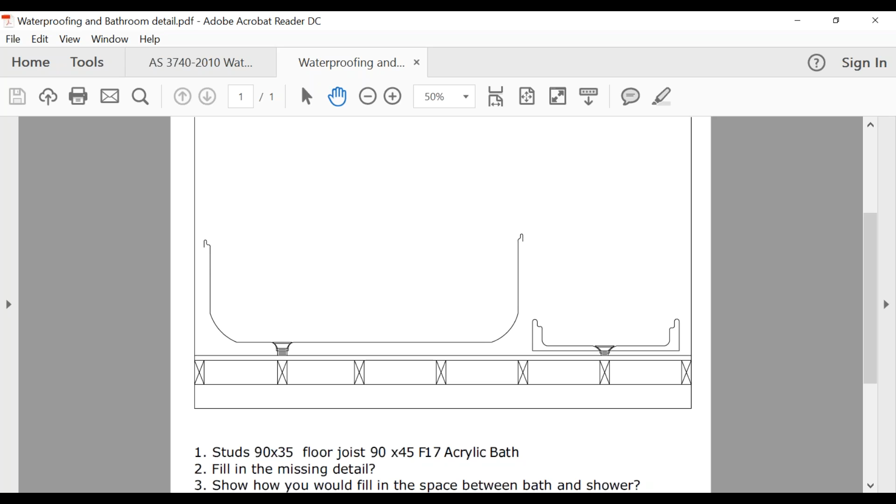So if you were doing this for real and you had a lot of time, and you had to draw that in, you'd then probably, after you've drawn it all, come back and reference and say 25 mil checkout as per Australian Standard 1684, clause whatever. So that's how big our checkout can be.

So we need to obviously draw basically that wall down there with our stud and then basically show - I know it's a shower, I'll come back down here - and then basically show how that wall lining is going to basically go into the lip of the bath with our sealant underneath. And obviously you might have tiles. You're probably going to have wall lining, then your tiles, and then your sealant. So show how that would work.

Then here we're going to build a hob, what I call a hob wall. Basically same thing, it just depends how high you want to make it. You know, quite often it's not much higher than the bath. It's pretty much done the same thing.

It's just checked out above your shower, checked out above your bath, and we normally put some tiles and stuff on top of it. But we've still got to basically look exactly the same as what it does on these drawings, because when the water basically splashes out, it still needs to hit those tiles and be able to come back into the bath or the shower.

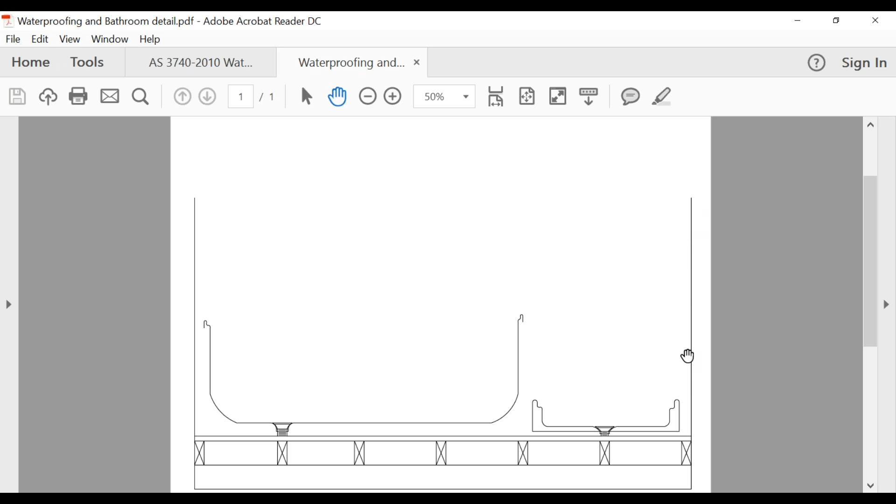And then we need to basically draw how the shower would work here. And you can see already there's actually a couple of mistakes. This might be something that you get - they haven't been doing this much recently - but when you've got to draw or fix some elevations, you can see that those studs, not studs, how good am I going, those joists are actually underneath the waste.

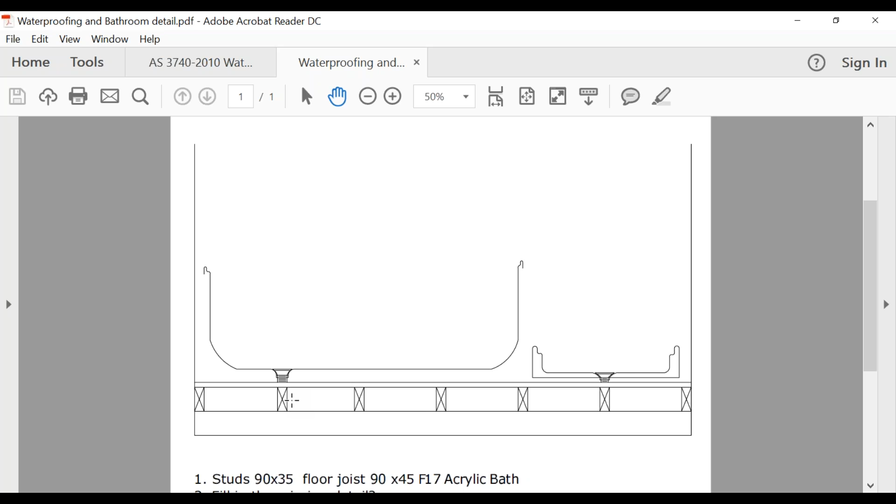And so what we need to do is obviously maybe put one either side of that and not go past our maximum spacing. And because obviously we can't drill through our floor joist for our waste to go through it, because we know that when we look at our penetrations and so on in our studs and how much we can drill out of our timber members - and yeah, you can just tell by looking at that it's going to be as wide as what the floor joist is anyway.

So we're going to fill in that missing detail. It says how would you fill in the bath, the space.

We're going to use a little hob wall. How would you support the bath? I'm going to actually talk about this before you guys draw it in.

Now, me personally, when I do a bath, I actually put a mud mix underneath it. When I say a mud mix, it's actually a mortar mix, basically just your sand and cement, mixed up. I build my bath hob first, have the bath sitting there, mix it up in a wheelbarrow, and then just shove it underneath. What it does is give our bath more support and also stops it from moving.

So a couple of things depending on how you do it. Some of you might laugh at this and others might say, yeah, I've seen that done, or no, I do that. One thing, when I was in Queensland, there were a couple of guys I knew who were big fans of using expander foam underneath their baths. If anyone's actually done a bath, it's a bit dicky when you're trying to push all that mud all the way back.

So what I knew of some guys, they would actually build their hob, put the bath and everything in it. What they would do is put the sheeting on and pretty much fill the bath three-quarters full of water with the plug in, then spray it full of that expander foam, because that fills in all the gaps.

And that supports the bath. I was always a bit wary, going, geez, I don't know if I want to do that, because I don't think expander foam is real structural, and the last thing I want is that bath tearing in half, because to fix that would be a lot of money.

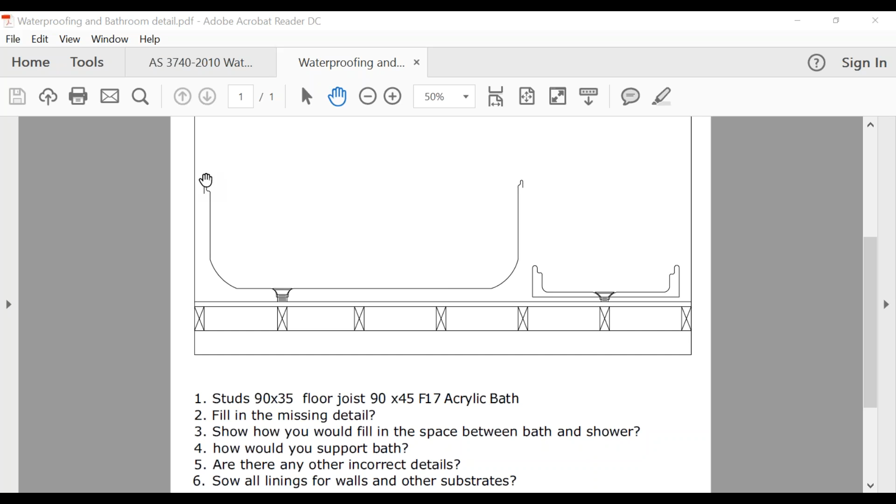So pretty much what I said, if you've drawn it, basically with these studs down this side on the bath, showing something like that, then that's all I've got drawn on my side, where the bath meets the wall. Then I've obviously just changed these studs—I call them studs again, how good am I going—these joists, to basically show that they can't go underneath the waste. Then I've drawn just a squiggly line to represent my mud that I've got underneath there.

I've just drawn a little wall in there that only goes past the top of the bath. You can make that as big or as small as you like. And that's just checked out pretty much like that where the bath is.

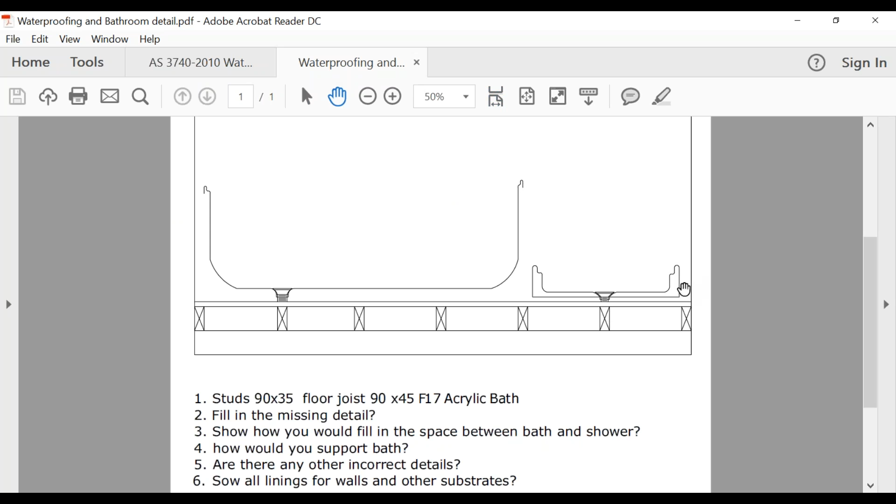And then on the bottom of it, I've got it checked out so it looks like that. It shows the wall lining going into the shower basin, into the shower tray. I've obviously moved this floor joist as well either side. And then on this wall here, I've just checked out the wall again and shown it the same as what was on that little hob wall, which is like that, with my checkout, got basically my wall lining and my tiles, and then my silicone underneath it.

Yeah, you got all that? Yeah, cool, no worries, Valavan. Valavan's asked me, can I take a photo of it? Yeah, no worries at all. I'll do that and I'll send it over.